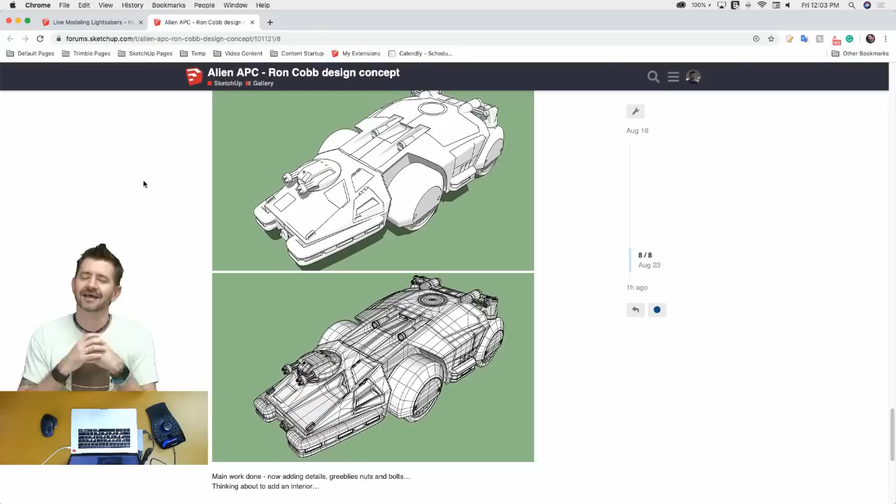It's pretty cool, it's one to keep an eye on in the forums. And that is by no means to say anybody else posting on the forum is not posting good stuff - that one just caught my eye. It was towards the top, and like I said, it seemed to be kind of in line with some of the other stuff we've done.

Awesome, so I said a lot of things. Now I want to hop in here, and I need your guys' input. Before we get rolling, we've got to decide what we want to actually do.

So I found these, I can't remember where. I literally just did a Google search, and I found somebody made these awesome, great drawings. There's probably more, but I found 4 that I was excited about.

Tengel07, hopefully I'm saying that right, showing up on the stream. You're doing an awesome job, well done. Glad you're on the stream, that's awesome.

So I caught you on that one. Hey, Red C's back. So I have here images for Darth Vader's lightsaber from Empire Strikes Back. Those of you who are dedicated Star Wars fans, if you're a committed Star Wars person, you know that Darth Vader's lightsaber hilt changed slightly from one movie to the next. So this is the one from Empire Strikes Back, Luke Skywalker's Empire Strikes Back hilt, his Return of the Jedi hilt, and then Obi-Wan from the original New Hope movie. So we have all of those.

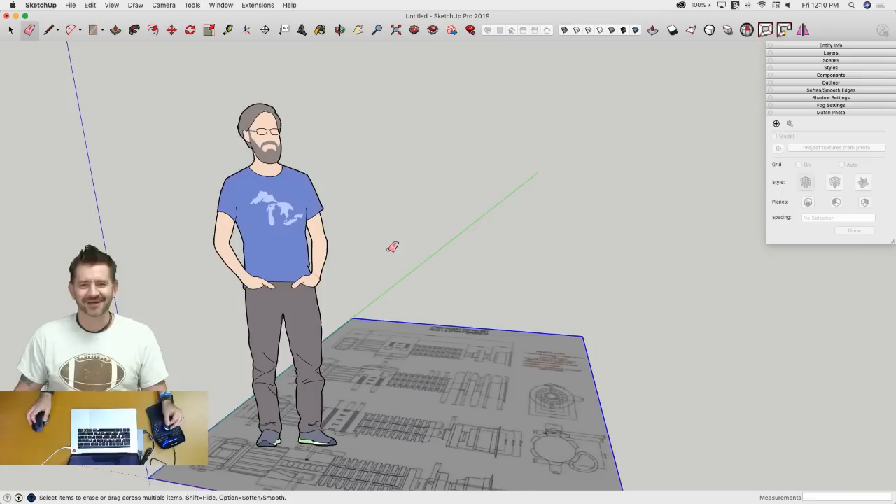I didn't even think to doctor up Mark for this thing. Should have put him holding a lightsaber, put a sweet Darth Vader mask on him or something. Man, really dropped the ball on that one. Remember Pirate Mark when we did the pirate ship?

Anyhow, bye Mark. Okay, so I'm trusting that this is the proper dimensions. I did not go out and verify. We're gonna assume that this is all right.

I will come back. So I did mention that photo match. Somebody asked about photo match. We'll do another video with photo match in the near future, I'll try to work that into one of the next ones.

Yeah, I blame you for that one, Steve. Come on, man. Where were you?

So right here, this right now shows this as 282 millimeters. So that's pretty small. I would be concerned modeling this to scale that I would run into the small face issue in SketchUp. SketchUp is really designed to be an architectural modeling tool, so it does have a limit to how small a face it can model. It's something like 1/1000th of an inch, but when we get into fractional millimeters, we can run into those issues, especially if we're going to do any rounded or smoothed parts.

So what I think I might do in this case is actually scale this to meters. So right here I have my biggest dimensions, the full length of the hilt is 282 millimeters. So I think what I'll do is I will just scale that as meters, and then we'll just scale it down by 1000 afterwards and have a proper sized hilt.

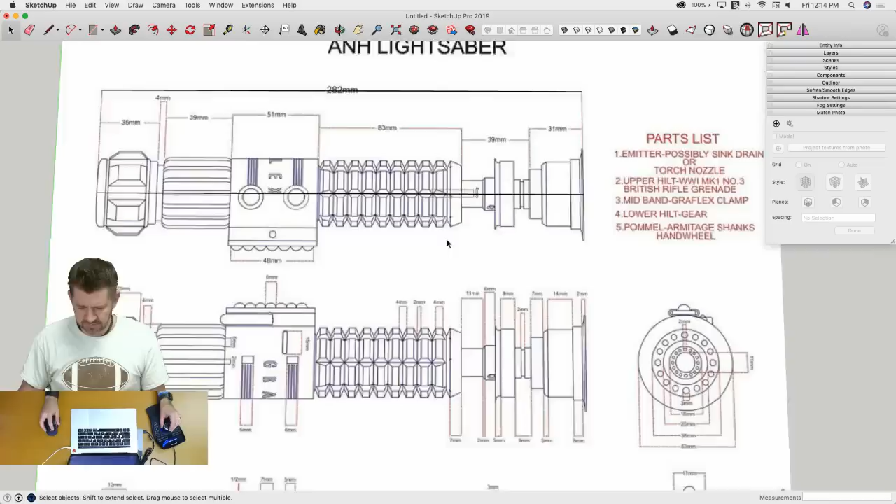Right down the middle, so that's going to be my center line. So what I want to do now is build this rectangle, and what I want to cut out of it is this shape. I'm going to carve that shape out, then do a follow me around a circle to get most of this. I'll have to come in and cut out this part of the grip.

Same thing down here. I'm a little confused about what this is detailing, but same thing down here. Maybe I'll just build these pieces on. So that's kind of my thought, is to start with a big follow me and then make adjustments to pieces from there.

So to do that, first thing I want to do is figure out where to start, right here. I don't want to arbitrarily just start drawing this stuff. I want to take advantage of the fact that I have dimensions here and build it properly and to scale. As I'm sure you've noticed, I've been called out for usually just building arbitrary and making it look right, but this time we have the dimensions, so I'm going to try to use them.

All right, first thing, this dimension from the middle up here is going to be half of this. I think this is the end - this is looking into the emitter, I believe is what that thing is.

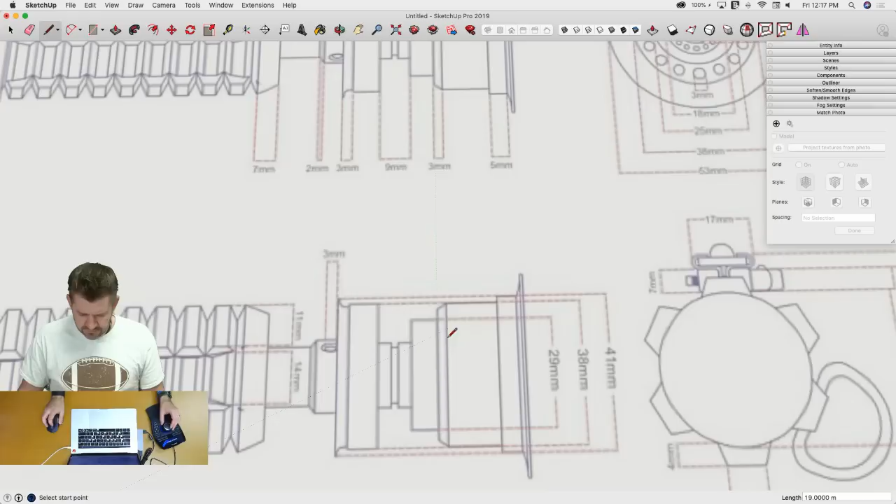Then we have this 3 meter step, and that drops to something. No dimension for us, so we have to guess that angle.

Yeah, these are not PDFs or anything, they're actually JPEGs, so they're not super high resolution. As I'm zooming in, I am seeing kind of fuzzy - that's not your screen, that is actually what they look like. I probably could have found vector illustrations if I kept looking, but I just grabbed the JPEGs I found when I first looked.

All right, so now we're at 29, so half of 29 is 14.5. And I'm saying meters because I'm actually drawing in meters. 7 meters, and drop that down. I'm just going to delete these interior lines as I go because I just want that one shape to route around. Let's see, how wide is this?

17, so that's 8.5. And then that goes across. They have this kind of detail weird - it's a full 9 millimeters.

Drop down, and then in the middle there's a 2 millimeter. So I'm going to go right here to the middle, come over 1, drop a line down, and go here back 2, drop a line down. Then for the difference here, that little cut in, I think that's right here, so it's 1 millimeter down. 17 overall to 15 overall, so I'm going to come here, drop down 1, cut that across. Woo-hoo, we're doing it.

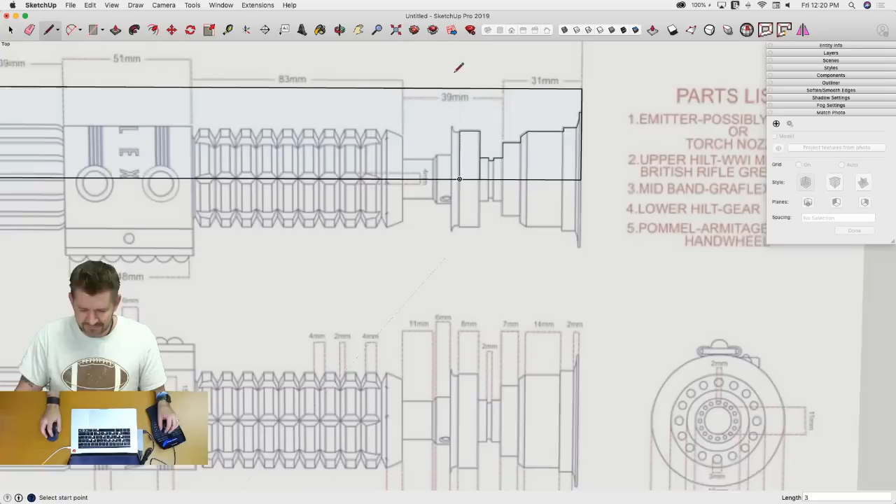My problem is I don't know millimeters well enough to know what I'm looking at when I look at a measurement. So, this is 41, so that's going to be 20.5 millimeters. Is that better? Can I say that? All right, and this looks like it's kind of got a 0.5. Don't worry, I wasn't upset or anything.

You're good, so I'm going to come over, I'm making this part up. I'm going to come over 1 here. This looks like it steps in a little bit. I'll go 0.5 here, 2 here, and then something like that. Yeah, I am drawing at scale, so I don't lose any small faces.

Let's see, width here is 19. So that's going to be what, 14.5? Well, that didn't work, I'll try it again. 19, no, half of 19 is not 14.5. Oh, I blame you guys for that one. Let's go 9.5, much better. All right, that's going to be 6 millimeters. Math is hard, you know.

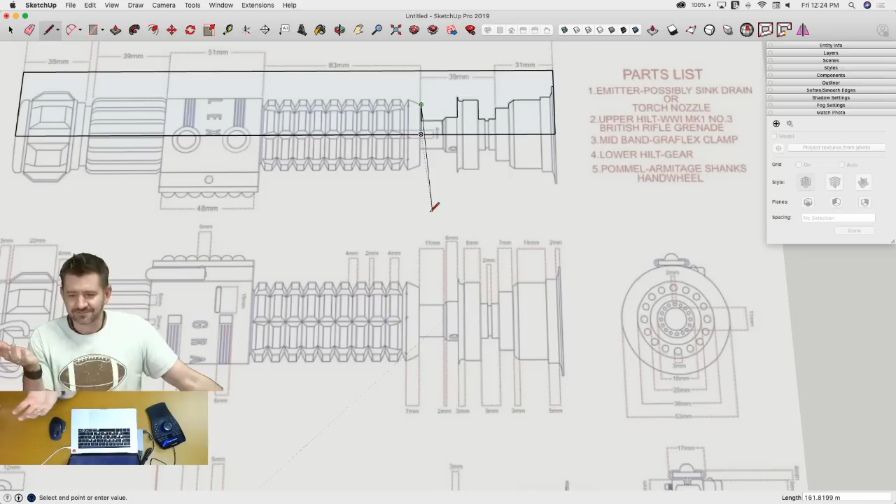Selt Balladeer, hey, you made it. I thought you were gonna have to wait till Saturday morning to watch this. I had a huge compliment on the YouTube comments yesterday. Selt Balladeer, I don't know if I'm saying that right, commented on YouTube that he couldn't watch the live stream because he was working, but he would watch it Saturday morning. It's like his new version of Saturday morning cartoons. And as a child who pretty much lived for Saturday morning cartoons, I took that as an enormous compliment. So thank you very much, I appreciate that.

All right, so here, where was I? Oh yeah, so I thought this said 35. 35, half of 30 is 15. So it should be, what did I put, 16.5? That's the problem. So it should be 17.5. No.

That is 35. What if that says 38? What if I can see this any better? What if this looks any better in preview? That's better, it's 38. It looks like it's about the same width as this one. That was 38. Okay, 38. 38 it is.

All right, so we're going to go. Half of 38 is 17? No. 19, there we go, whew. Mathing. All right.

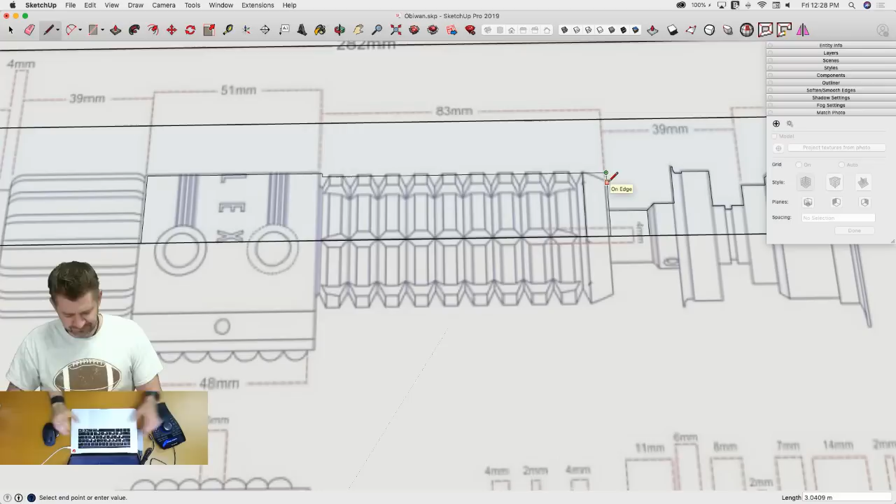Yes, I thoroughly enjoy the idea of drawing a 38-meter line, grabbing it by the midpoint, and dropping it on. I was trying to look smart for you guys, and well, obviously that didn't work. So that would be a great way to avoid the math problem.

All right, moving along. We're just flying through this thing. Obi-Wan's gonna be done in no time. All right, this is a 41 millimeter, so this is 0.5 meters up, and then 39, and then drop back down. I'm gonna come back and round this off in just a few minutes. I want to finish off the profile first, and then I can come in and add a couple details before I do the full follow me.

All right, so next thing we have here is this little collar, just a little step in. There we go, 33 millimeters. So that's 16.5. That's showing up close enough, so I trust it. I sometimes trust my math abilities.

38. Ooh, that's the same dimension as we had before, so I can actually just reference this dimension right here and then come across 4. I'm just dropping lines back down again, so I have that solid line to pull off of.

All right, now for this part, I guess I'll put as much detail in as I can. I don't know in the actual piece if these sections right here are rounded between these pieces that step up, or if that's a flat piece. Either way, we can draw this thing in, and then we could smooth that out with the circular face, or we could actually keep the curves. Either way will work.

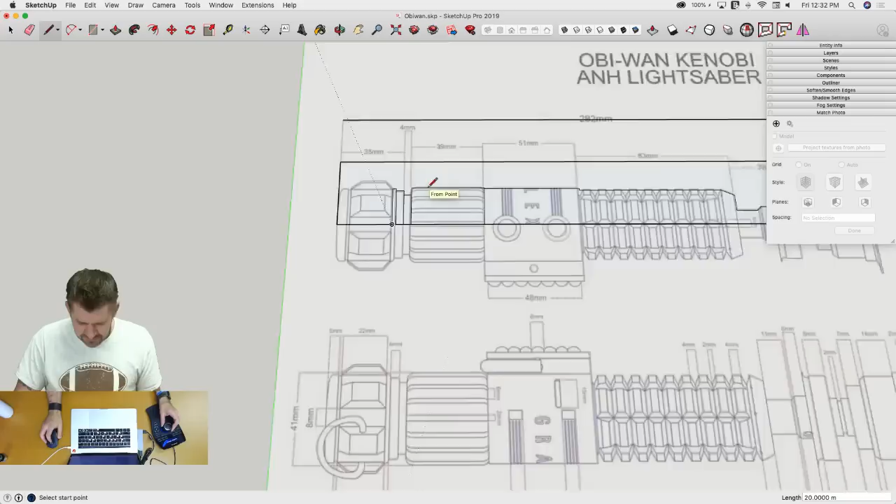This is the one where I'm kind of not quite sure what to do. I guess this is that line, maybe. I don't really have a dimension to it anywhere though. All right, let's see what the drawing tells us. So if I wanted to come up to here, 19 looks a little too short. So maybe it actually is right there, so it could be the same dimension. All right, we'll start with it. We can always make adjustments, right?

It's never too late. All right, so we have a 2 millimeter inset there where it steps down. Does not have a specific dimension, but I'm assuming it's like 1 millimeter. I'll come over 2. And I do have a dimension on this end cap, I think. Right here looks like 40. So, 20. And then last 5 millimeters.

All right, so that is the basic outline. Now I want to come in and just add a few details. I have just a couple arcs I want to put on here. So I'm going to come in with an arc right here. I'm just going to drop that same arc. No, it's not going to let me do that. I'm going to pull that line straight across like this.

Temporarily delete that. No, still doesn't want to. All right, I'm just going to recreate that arc real quick.

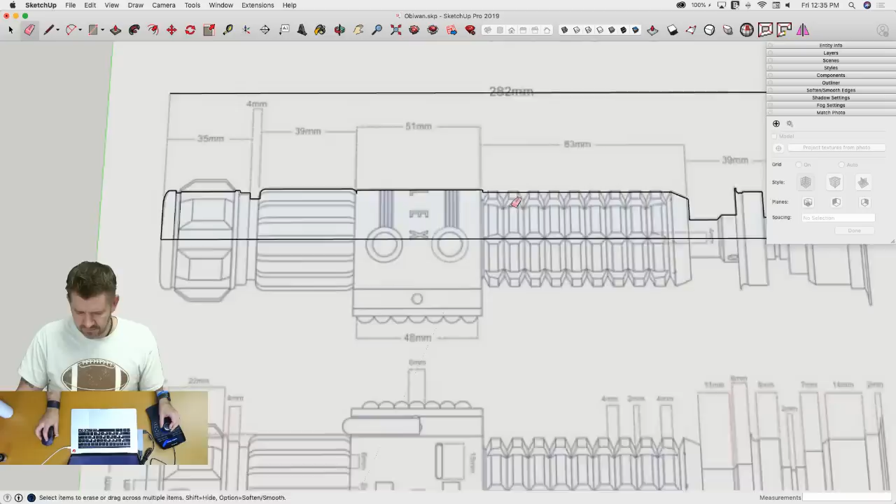So here's the other thing I'm kind of thinking about. I do want to hold on to this. I'm gonna make this a step in. I can't see the detail here, but I'm going to force that to be a little bit smaller, stepped in there. And then I'm gonna delete all my interior lines so I have one surface right there.

And I'm gonna save, because why wouldn't you? Of course you would save. Silly question. All right, now I gotta pick a circle to make that turn on.

So the difference between Bezier and arc, the standard arc tool - well, I say standard arc tool, but it's actually the 2-point arc tool - lets you pick 1 point and then another point and then drag what it calls the bulge distance out. And the bulge distance is the perpendicular dimension from a line between the 2 points to the middle of the arc. So that's the bulge distance, that's how it's always uniform like that.

When I go to Bezier - Bezier is not technically a native tool, it is an extension, but it's made by the SketchUp team, so it's actually kind of like a standard tool slash extension all in one, I don't know how you describe it. What this lets you do is pick 2 points, and then I can actually pick the control handles.

So where is this first arc, this bottom point, where's the arc going to go to? And on the second one, where's that going to pull from? So I can create much more flowing arcs, and they don't have to always be basically a chunk of a circle. The standard arc is always a piece of circle that's put out there. The Bezier will let you actually make non-standard arc shapes.

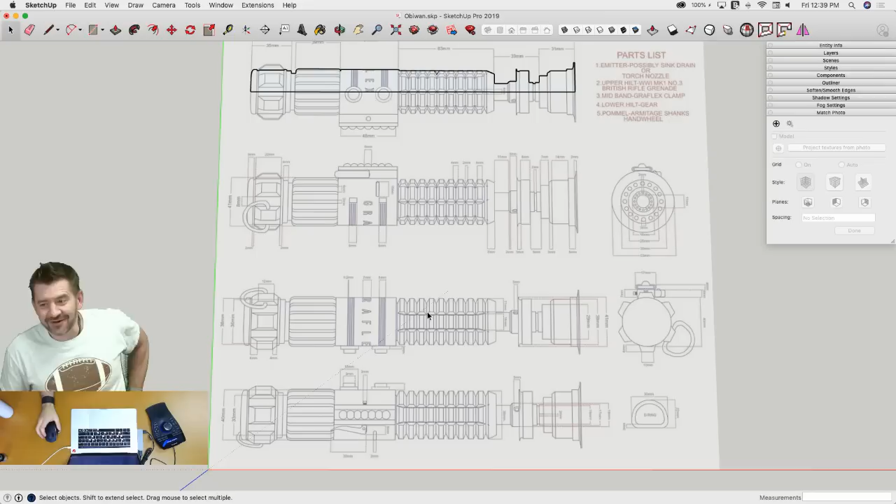That's odd, so can anybody find good pictures of that? I'm gonna throw that out - if anybody can find a good, solid, maybe isometric picture that'll help us figure this out, that would be cool. I do know that, I think, again, from documentaries, I think this is like the handle of a grenade or something. I can't remember, it's something weird.

Oh no, because it is 6 sides, I'm just looking at it rotated. We're good, brain just had to work through that one. Never mind, let's move on. I always appreciate you guys. Just let Aaron talk a little bit, he'll figure it out. All right.

So if I dimension across this, I think... oh, it's 4. So okay, so I have to go, so if I draw a line that is 4, I grab this and this, option copy. I'm not doing an array intentionally because I actually want to see where this stuff all lines up.

Okay, so one more option. Whoops, help. Oh, I got the picture somehow. There we go. Option copy. And I guess just one more right here. I'm a little off right there. So that's where I was wondering if I might need to.

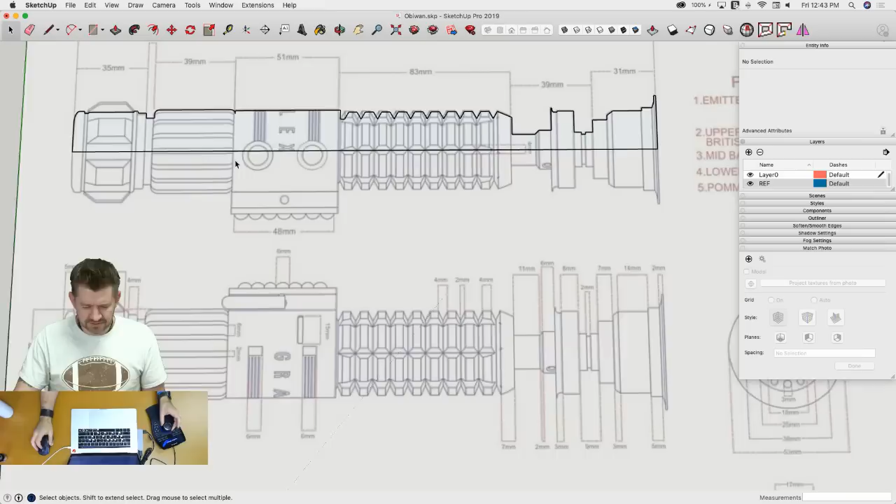My question still remains, how many sides should we put on? We want to do something that's divisible by 6. I have 6 things here, 6 things here, so it's going to be easiest if whatever I create, my final extruded shape, ends up divisible by 6.

Other thing I'm thinking about is right here. I'm not really sure what these are. I assume there's some kind of cuts into that rounded off piece. 1, 2, 3, 4. I don't know how many there are. Because what would be nice is to come up with a number of sides that is divisible by 6 for this part and this part, and divisible by whatever number this is right here.

I don't know if anybody has a good Obi-Wan image that can tell how many of these there are. 1, 2, 3, 4. So maybe there's three on each of the 6 sides. There's a picture on the forum that just went up. It looks like they're definitely cuts into it. Pretty sure that's the original movie prop, because I know that was 3D printed. Just kidding. 1, 2, 3, 4.

12. Okay, 12 happens to be divisible by 6 as well. So I might just go with the standard 24-sided piece. The nice thing is I'll do it once, we'll look at it. If it looks like it's not quite high enough geometry, we can always come back and change it.

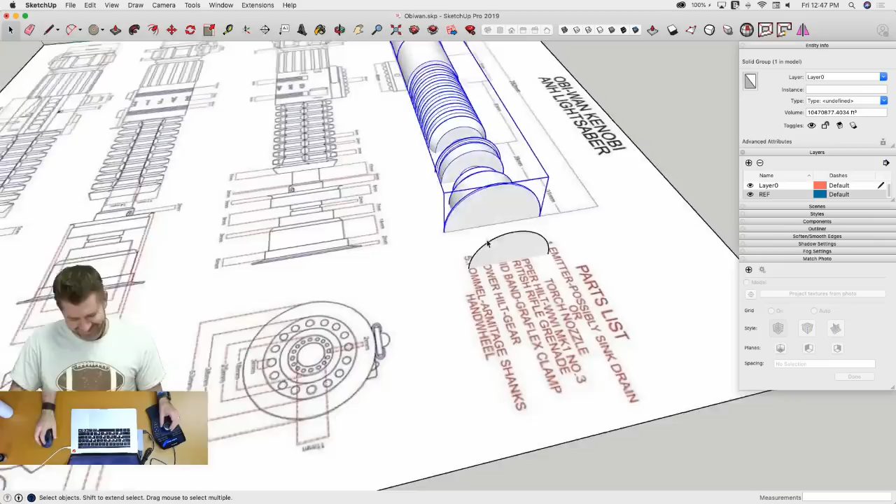Good-oo, Jimmy, you win. That's good-ooing, boy. You guys Simpsons fans? I used to watch Simpsons a lot, so I get Simpsons lines running through my head all the time. You got one too? Oh, thanks, Marvin.

All right, so that looks pretty good. I'm tempted right now, before adding this additional piece, to just stick this thing in here. I never really understood what this was, but it's on the side of a lot of the original trilogy lightsabers, and it's cool looking.

So I want to do it, but I think I'm going to finish my volume here first. I'm going to go make my cuts here and get my little pieces popping out in back. So here's what I'm thinking about—I'm going to draw a line right here, make it a long line.

This cut down—what did we decide it was? That was 3.5 millimeters, right? So I'm just going to draw that same triangle, assuming it's the same, and we'll find out right away if that works or not. And this was 2. Actually, I'll just drag it up so I have a bigger piece of material.

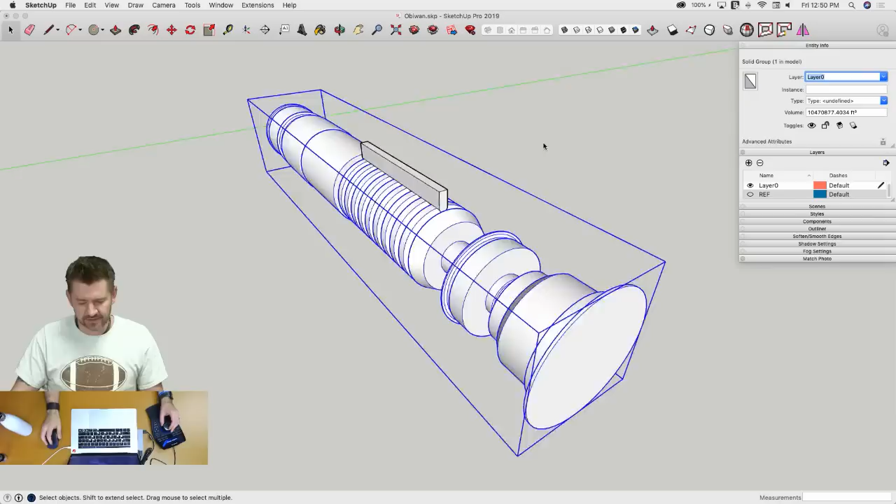All right, so what I could do right now—I have to remember, like I was saying, this and this are going to intersect. It doesn't know that this is only supposed to intersect these rings. That's why I had to use scale to pull it back, so it wasn't offsetting or cutting out of here.

Now that I have this, I should be able to save. Always be saving—ABS.

Go to Solid Tools, and I want to trim, not subtract—if I subtract, I'll actually lose my cutting group. By using trim, it cuts out of one volume but keeps my cutter. So I think if I hit trim and click on this... I'm probably doing this backwards, but ooh, I didn't do it backwards—it worked.

All right, I'm going to go ahead and rotate it. I'm just going to draw a line right here down the middle and take that right now—at the middle, yeah. And I'm going to... there we go, I'm going to rotate that. Oh, I didn't do it right.

I had it backwards. That's a cool looking little thing. I made an offensive weapon of some sort. Undo, undo, undo. Okay, let's try it again. Select this one, trim that from this volume.

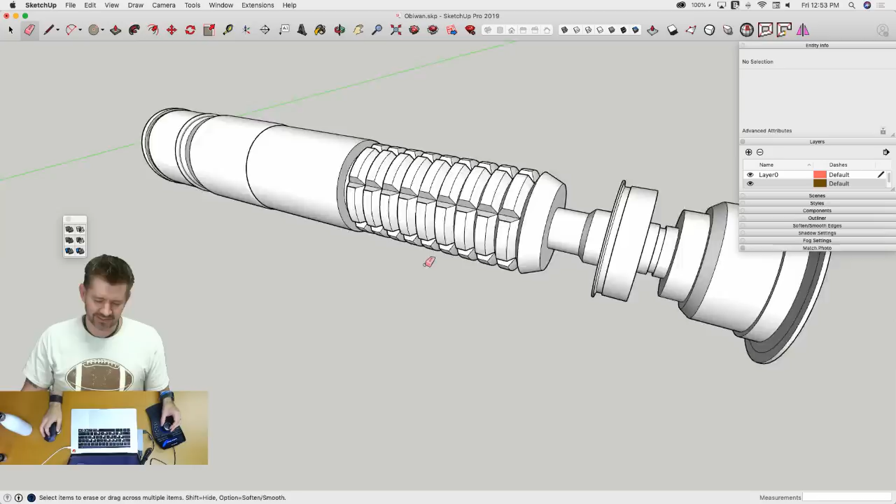Now I'm gonna turn my reference layer back on real quick. Whoops, I made another layer. I must have put this onto... nope, I don't know. I made a blank layer. I hit space at some point and made a new layer.

Anyhow, all right, so it does look like this first 2 millimeter cut does line up with this centerpiece right here. Ooh, I got an ooh and an ah from Marvin. Extra points right there. All right, I'm gonna come in here to the top.

So this gets a little bit, so this is rounded on both sides. So sometimes clicking... I use the facets of the circle a lot to arrange things and align things, which is why I really try to make sure when I make circles, they're on axes. In this case, everything got rounded, so it can be a little harder to use these as reference, and that's where I turn on show hidden geometry.

So what I can do here is come in with a rectangle. I'm going to hit Option to snap to the center. I'm going to hit the up arrow to draw from the blue axis, so I'm drawing it flat, and I'm going to click right here. And I'm going to pull it out. Let's see, how far is it to here? That's 39 millimeters, so I want to say 39.2. And that gives me that rectangle.

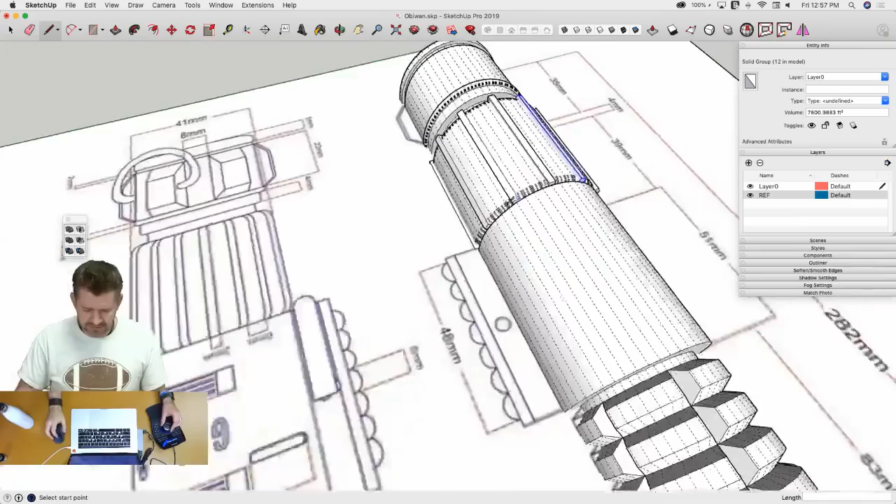We'll try it, X11. That doesn't seem like enough, you guys. Not arguing with you, just saying it doesn't look right. So it is dimensioned on here as these pieces are 2, and then these pieces that are risen are 6. So if we do this, this is 2, and this is 9.

So I'm wondering what happens if I take this, and rather than going 30 degrees, what if we go 20 degrees? I don't know how many copies to make, 15, 20, I don't know. All right, let's see what that looks like.

So if I dimension that, this says this is 2, this says this is 5.3. Looks closer though.

Let's see, from here, if I look straight down on it, this shows me 1, 2, 3, 4, 5, 6, 7 of those cuts. 1, 2, 3, 4, 5, 6-ish. Yep, this is where we decide that this is Aaron's Obi-Wan Kenobi lightsaber.

We're getting very dangerously close to the point where math is going to get involved, and I just can't do that right now. So I'm going to save this, turn off my hidden. I'm going to grab all of my cutters, and I don't even need to worry about it, sorry, I tried to do things and talk there. I don't know, I'm just going to cut it. Oh, I'm not worried about losing my cutter since I made copies of the cutter.

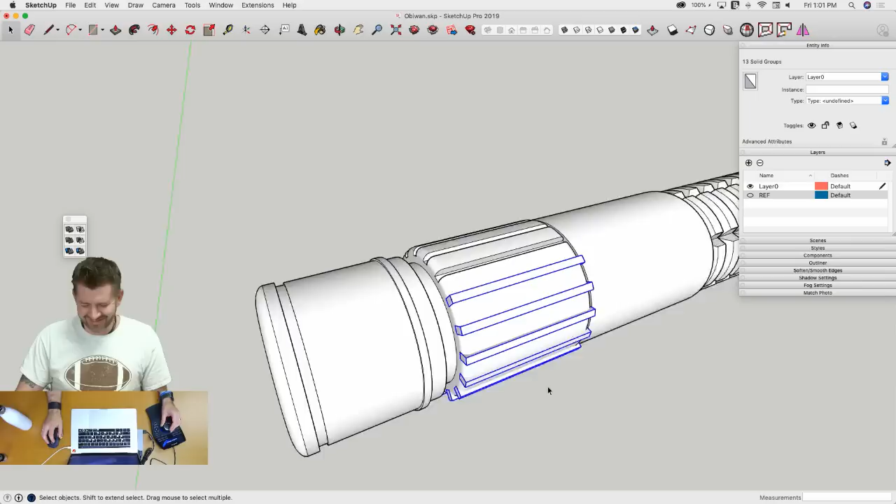Oh, yeah, that's exactly the thing. Dave. It's just a good thing you're here, man.

All right, I'm gonna come in here, select all these other groups, explode them, and now I should be able to select this, cut that from this all at once.

You know, sometimes... I don't know, I want to be cocky and say I knew that, but I believe Dave has called me out on doing just that exact same thing in the past. But yeah, this is what happened.

Okay, anyhow, yeah, there was a measurement for those exact pieces, but I don't know how they're being dimensioned, because this is being dimensioned along a round surface, so these are actually kind of like ribs standing up on the metal pipe too, so they're a little different, but this works for what we're doing right now.

All right, I'm gonna draw one of these teeth. There are, I don't know, they look like gear teeth, so that's what I'm gonna call them. I'm gonna draw the middle of one right here, flat on top of the image, using this as a reference. I'm gonna come out. Is there a dimension for how tall these things are? Nope. All right, so I'm just gonna come out.

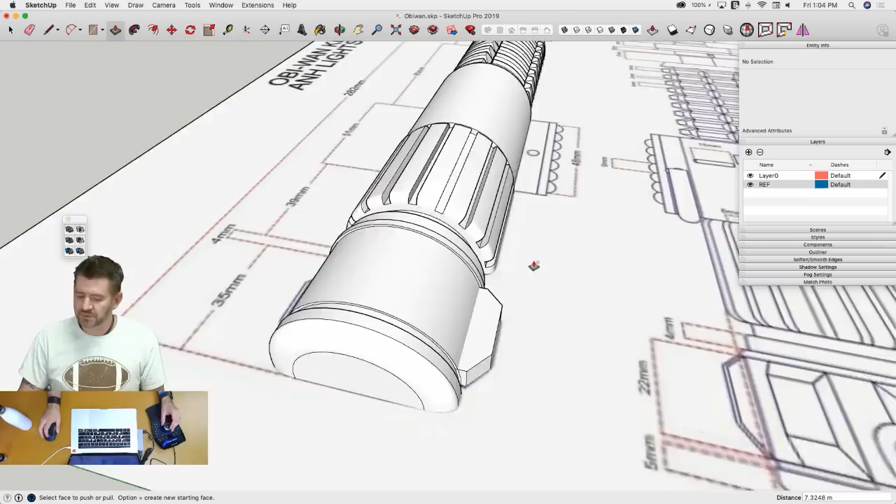Most people who regularly use 3D mice were in favor of getting one. I thought of that because this whole thing where I switch underneath and model it, or come in close on a push-pull inside a small surface like this, is super easy with a 3D mouse. Just throwing that out there, you guys know I'm an advocate for it.

All right, I'm gonna make that into a group. That should be solid. This one's easy because there's a total of 6 of these. I don't know why I keep deleting this line on the end. This is my midpoint, I need to hold on to it. I'm gonna grab that, that would be 60 degrees, times 5. All right, there they are, looking good. Now what I should be able to do is grab all these and make them into a group, go into that group and explode them.

So there's the question, did I need to make them a group originally? Anytime I move geometry around on other geometry, I tend to group it. Yes, this is a group, this is locked, so there's not a whole lot that I could have accidentally merged with, but I do it out of habit because as soon as your geometry sticks together, it's a pain to go in and take it back apart. So I group things anytime I move any geometry.

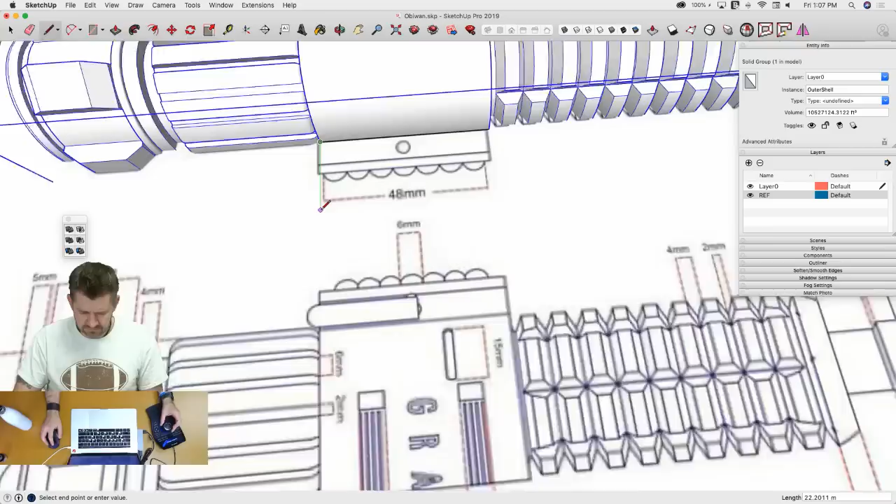So I'm going to again start with, here's my reference line. This comes out... showing no, that's the 7 millimeters, see where 7 ends up. Oh, 7's to here, the bottom part of the box. Oh all right, so I'll come up 7, and that's this.

And then this is actually, this is kind of a weird shape. How wide is this? 17 millimeters, again can't go with a nice round number, gotta force some dimensions on here. All right, so 8.5.

And what this actually ends up being is there's kind of a piece of metal that wraps around in one direction, and then this array right here with all these little round studs, which are like little plastic bulb things, are actually held by this piece of metal, which you can see in the profile here, actually sticks up and grabs onto it like that. So I'm not going to get ridiculously detailed in here, but I am going to put a little bit of this detail in because it's cool.

All right, so I'm going to leave a 3 millimeter gap in the middle. I'm going to grab this, make it a group, and I'm going to... oops, I have a habit of clicking Option when I don't need to. All right, so I'm going to do it like this, and I'll come down 4 millimeters, over 1.5.

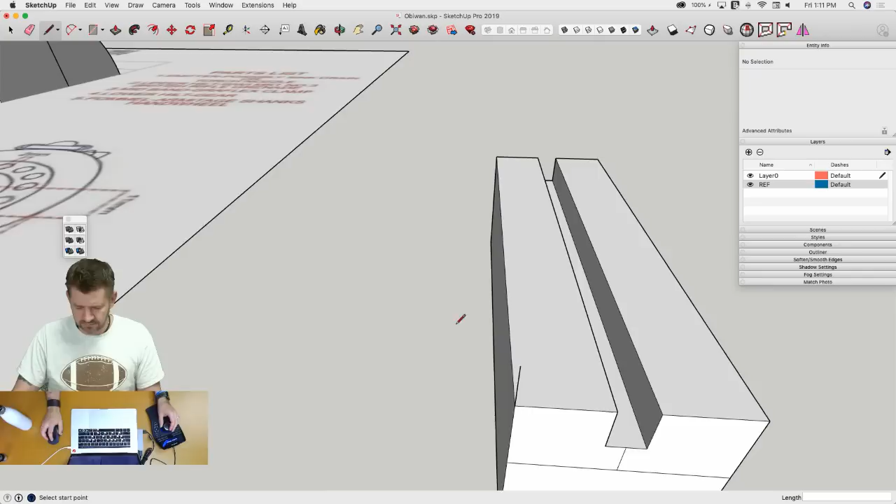And then what I had here was, look at this, got a little bit of an arc going on right here, here to here, just like that. I'm going to come down 1, go up 1. All right, that might not have been quite big enough of an arc there to close it all up.

Yuri says you can model a separate piece as a copy of a component. Yeah, I could have done it and left it in. You're absolutely right, I could have left that right where it was and pulled it out as a component. That is a good call.

I didn't because, I don't have a good reason for not having done that, but you're right, that would have worked perfectly. All right, I'm going to take this and swing it around like that, and push-pull that down. Get rid of some of these extra pieces, take this one down, and I'm going to stop it. I'm going to make that all into a group. I'm going to come in here right now because it's bothering me. Select all and soften and smooth. Oh yeah, it's looking good.

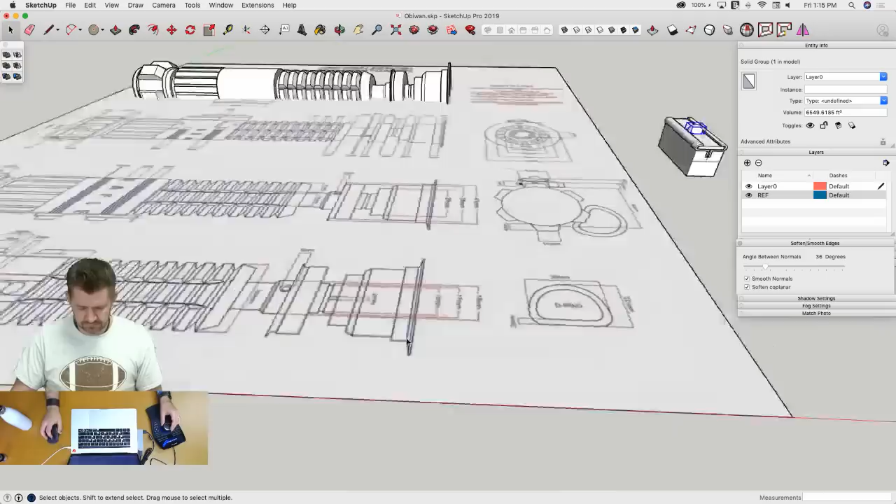Now, some of you think I might be tempted to use math or something here, but I'm not gonna, I'm gonna fight it. There is about, I'm gonna say, a 4 millimeter gap between the edge of the end circle and the outside of this flat section. So I'm gonna come right here to the middle, and I'm gonna say 4 millimeters.

Now I'm gonna grab this circle, grab it with move, grab it by that same endpoint, option, and drop it right there. And then I'm going to divide that by 3, enter, and that gives me my offset.

Doesn't quite look right though, does it? It's like they're, I don't know, I'm going back and forth. All right, let's just do this. I'm going to grab these 3, turn on my hidden geometry, go from the middle here, and just swing those around like that.

What am I doing? It doesn't look bad, let me do this. Let me make all this a group real quick.

And I'm gonna do this, swing it around like this, swing around like that. And I'm gonna grab by that same placement point and drop it right here so I can kind of reference.

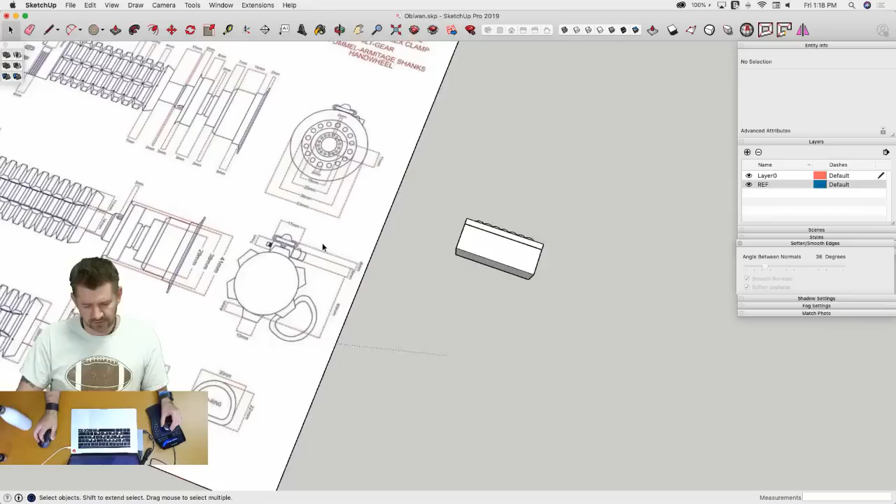So there is, I can't remember what these are called, these little pin thingies, like clips open, and there's like a little bit of, because of deformation, a little spring right here. It'll actually pop open when you pull up on it. One of those. I know my definition made no sense whatsoever, but well, I already said it, so I can't take it back. I'm going to make this.

So if we look at the different profiles of this, it looks flat right here, but I have a dimension here to put it in. And then here I have, it's actually a single piece of material that's folded over like that onto this pin right here.

I'm going to, I think I'm just, I don't know. I don't know what I'm going to do. I think I'm going to trace this profile since I have it, and then give it a little push-pull, and then offset the two pieces, and then come in and maybe loft together this end piece.

We'll see. So I'm going to do something like this, like this, like that, and like that. Let's see if we can just connect this together.

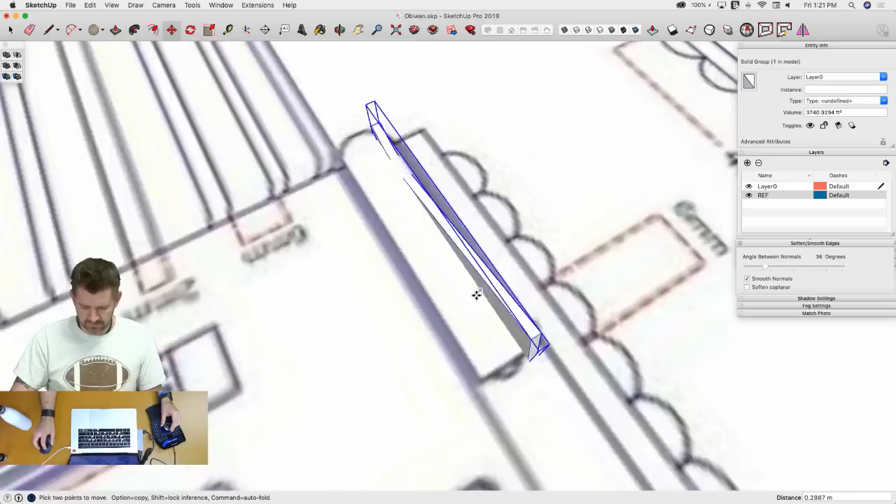And then, whoops, scoot it over this way a little, just a touch. And then we're going to go from here, slide this over this way, we'll say exactly 5 millimeters. I did something wrong, let's try that again.

Let's grab an absolute point, let's grab this intersection point right here. Option to copy, we're gonna bring it over. Let's see if 5 is too far. That'll work. How big is?

I think that's gonna work. If it's too big, we can make it a little smaller later on. All right, I'm gonna grab both of these and explode them.

I'm gonna go click here and draw. Oh, it's a cam lever. Cam lever, that sounds like a correct thing. Cam lock or cam lever. Yeah, that's the one. See, it's a good thing you guys are here.

All right, so I'm trying to think of the best way to do this. I want to get this - you know what, actually I need to do is I can round this off later. I'm gonna get rid of these little things right here. Is that around 1 millimeter? No. All right, so this will get a little messy, but that's okay.

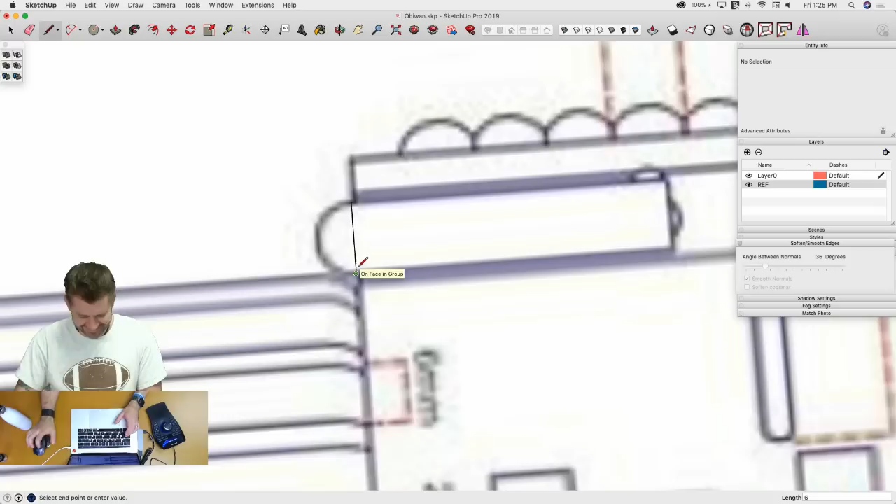And I'm going to draw a 5 millimeter line. Oh, 5 plus 1 is 6, sorry, 6 millimeter. All right, start over. Draw a 6 millimeter line and then draw a half circle arc like that.

All right, so that is what I want to cut out of my shape. So I'm just going to make a temporary - at this point it's just a cutting tool. So I'm going to make that and now make that into a group. Now if I go to edit, unhide all, get that back, and I can bring this over.

All right, there it's intersecting. Pull it back in just a little bit so it cuts. There we go. And as I have learned today, I want to cut this from this. Oh, and it's just that easy, guys. See? That's what I've learned.

Awesome, so there is our cam thing. All right, I'll soften that again. And one thing I didn't do here was I did not put a circle in, or a hole in here for the bolt to run through.

I'm just gonna put a 0.5 circle right there. I'm gonna run it all the way through, grab all this mess, intersect face with selection. That'll just break that, so I only have to do the circle once. And then I can just go delete, delete, delete. And now I have that, which I can

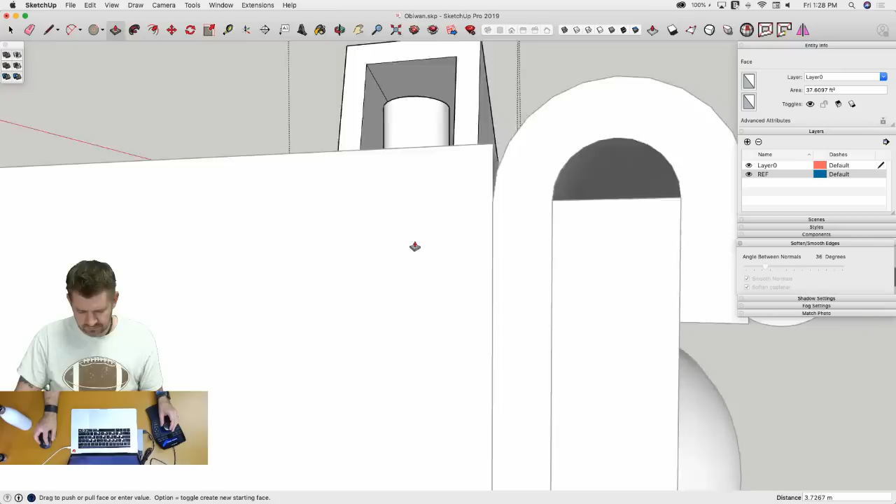So that's going to come up here, and it's also going to extend through. It's all falling apart. All right, get rid of all this. Just get rid of it. There we go. I have my circle up here.

Now I just pull a circle down through the other side, and then additionally. So that gives me this, which I can now, if I grab this, I'm actually going to move it by like that point right there.

Put it on my drawing. Do a little scooting to line it up. Like that. Now I know I can grab this one, drag it so it comes out like this.

All right, and now I can take that whole thing, make it a group again. I'm a big fan of nesting groups, thank you for asking. And I'm going to flip it 180 degrees.

And now I can grab this point. This is the point that I wanted to place it by, because that point should go right to there.

All right, two small details left. One is a D-ring. D-ring's going to be super simple. I'm going to draw a line.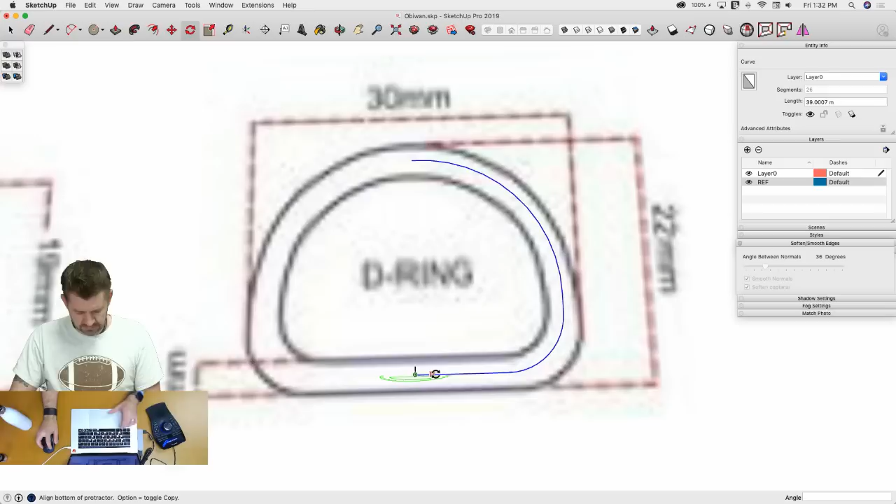I'm going to grab these 1, 2, 3, 4 pieces and weld them into one. Grab that piece. Option copy, option rotate to 180 degrees. All right, and the last thing is going to come to this middle point right here.

And draw a circle of 1.5. Now, actually I'll weld these two together too. So I'll grab both of those, extension weld, grab that distorted D-shaped circle, follow me, click here, and we have a D-ring.

All right, triple click, make that a new group. And I'm using groups instead of components, and I just realized I was doing that. So no, there's not a good reason for doing that.

Usually my rule of thumb is if it's a thing, you should be using a group. These are all things, but for some reason I'm not making it into, or if it's a thing, you should use a component. But I'm not doing that for some reason, so I don't know. I'm disappointed with myself.

All right, I'm gonna take this and I'm gonna just flip it over, because this right here is where this D-ring goes. So I'm going to start by rotating it 90 degrees just using the regular handles. I'm going to turn on my hidden geometry because I'm going to grab one of these points on the middle line.

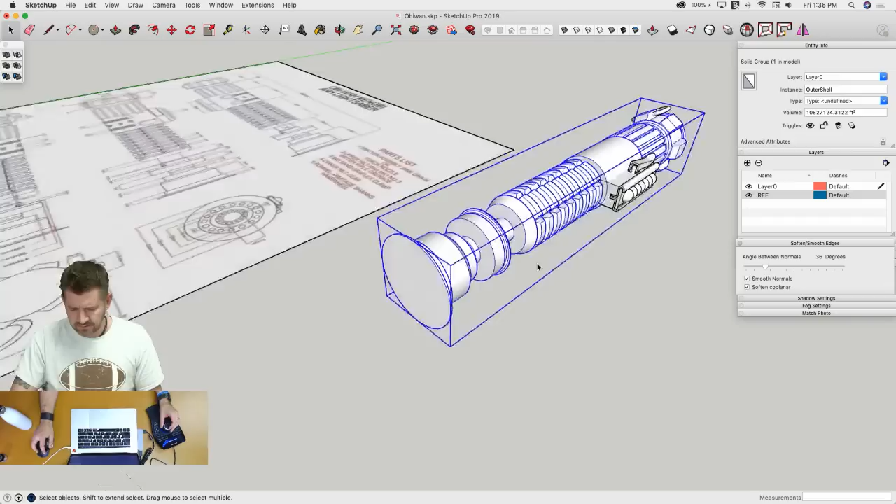So I'm gonna take this one, this is all, okay, so I'm gonna explode this temporarily. And let's see, from 53... now I'm gonna have to really do math. So that's a 2.5 meter offset. Nope, that's obviously not right. No, I'm cutting in half. There's a 5 meter difference. So 5, all right, that's that.

So then this is going to push in. Ooh, not very much, it can only push in about this far. And that's where these rings go, that's where these circles go.

And then from that, I have 5, 6, 7. I'll offset this 7 meters. And that can push into, it can go all the way down to this, or what if it only goes to... oh, it's too far. Maybe it goes just to here. How about that? All right, so that's this ring right here.

So now we go from 25 down to 18. So offset that another 7. Something doesn't look right there, but did I do that wrong? 8, I did, I totally didn't do that last. Undo, undo, undo. That's what I get for doing math in my head.

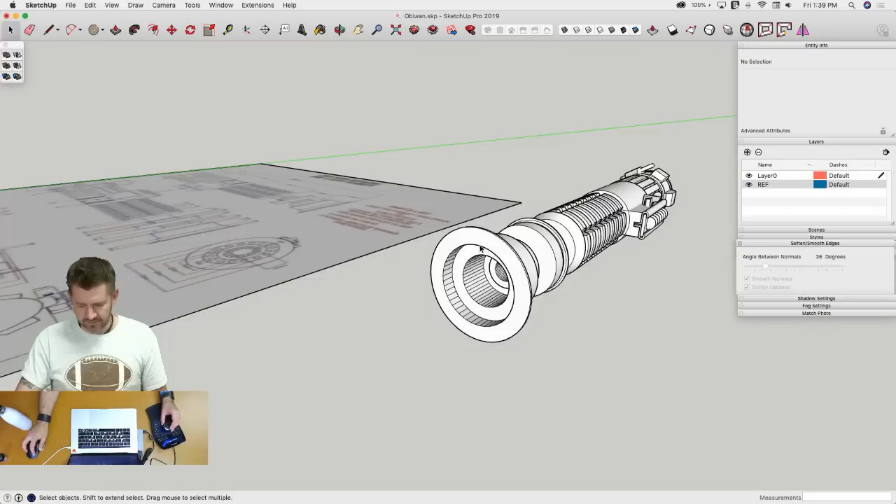Where are we at time-wise? About an hour and a half in. I'm not gonna mess with it. Well, no, I can't help myself, I gotta do the holes. It's only gonna take a second.

3mm holes, 1, 2, 3, 4, 5. Oh wait, 1, 2, 3, 4, 5, 6, 7, 8, 16 of them. Okay, so I'm gonna just draw, find the top of my circle, draw a line straight down. So on that, I'm gonna put a circle of 1.5.

Oh, I didn't draw it flat, did I? That's okay. All right, and then I'm just gonna pull this in. Sure, 5 millimeters. All right, and now what I'm gonna do, I'm gonna grab the geometry of the end and geometry there and the circle here. So everything that makes up that circle, and I'm gonna go, again, just gotta remind myself, don't have a middle point because it's not really a circle.

Like this, and I'm gonna bring it all the way around to 360, divided by 16. No, that doesn't work. Twelve degrees, no, 15, divided by 15 total? No, that was not right.

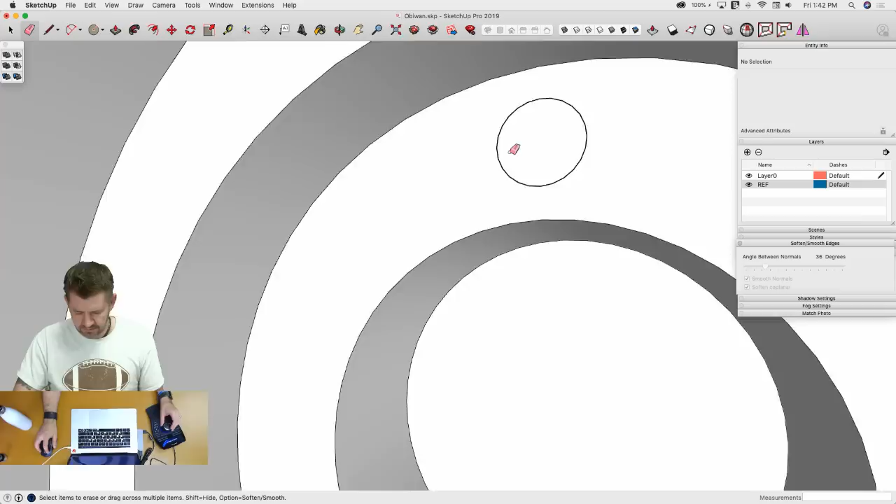For some reason, why is my circle not closing right here? I don't know why, but it is now. All right, so I'm gonna do the same thing, exactly the same thing I just did. I'm gonna offset that, or not offset, I'm gonna rotate a copy of that, 22.5, times 15. All right, and with that, our Obi-Wan's done. I'm gonna take this, make this back into a group.

I'm going to trim the D-ring. Oh, this is not a solid. Let's run solid tools and see why not. I have one internal face fixed.

All right, so I'm going to take the D-ring and trim it out. That's going to give me a hole in this tooth or whatever thing it is. There we go, that intersects correctly, but I do like it as a separate piece. If I ever wanted to build this, I would obviously build that separate.

Trying to decide what to do with this. What I think I want to do is explode this group and then intersect. I'm going to explode this group too, and I'm going to take this piece and this piece and merge them together.

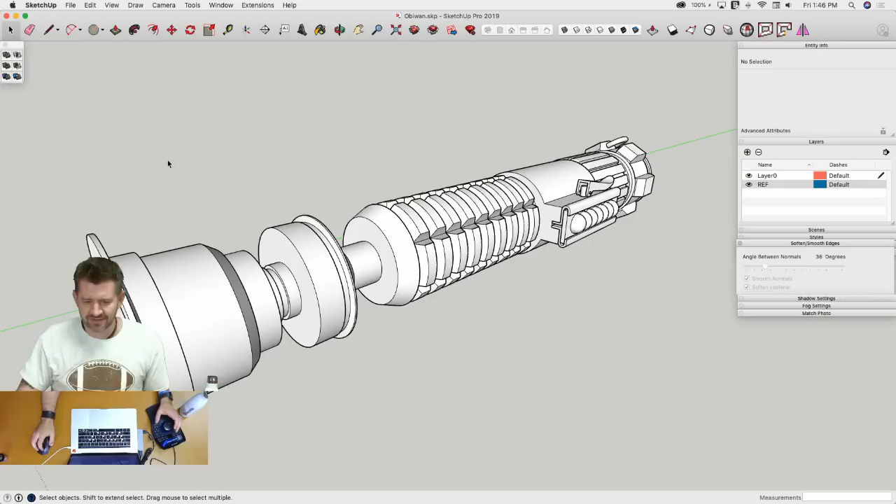All right, you know, and here's the thing. If I hadn't had to do math on that, we probably would have ended 20 minutes earlier, but I gave in and tried math instead of just having SketchUp figure it out for me. But SketchUp could have figured it out for you? If you know the right tools, you can get away with doing as little math as possible, which is something I work pretty hard at, avoiding math.

All right. I'm going to save that. I'm going to start a new one.

Okay, hello in India. Zion just joined, and what time is it in India right now, Zion?

I'm going to go, we said Darth Vader next, so I'm going to go ahead and import. Desktop, where's my Darth Vader? There we go, I'm going to import Darth Vader. Oh, hold up.

One last thing here. I'm going to grab this and scale it to 0.01 because we want this lightsaber. Almost forgot that piece. This lightsaber should be, was it 200 something millimeters? 2 meters. So wait, hold up. Let's go.

Jump back to millimeters. If I draw a line from here to here, oop, I got to scale it down by 10 one more time. I should have done 0.001 to scale that to the proper size. Nope, I did it wrong again. Told you. I just need 0.1. That's all I got to do. Keep it simple, come on me. All right, look at that.

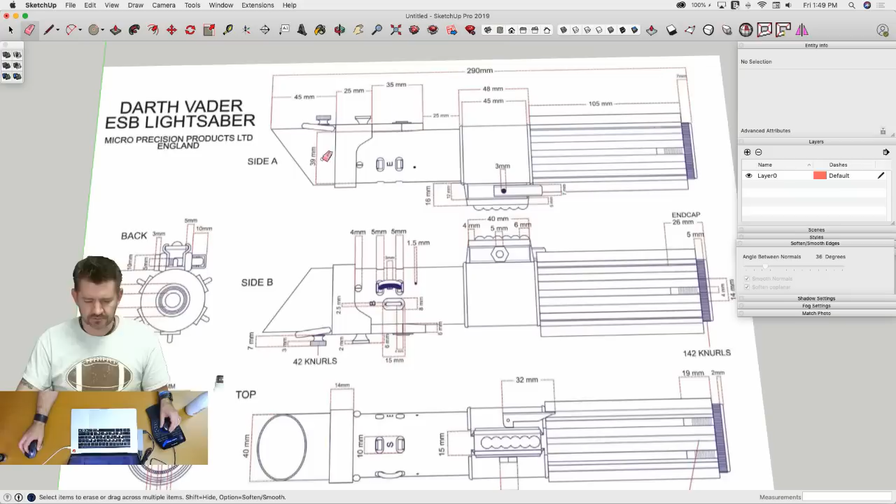I was just thinking maybe I'll try to model it exactly like that, see if I can do it. So 1, 2, 3, 4, 5 main pieces. We'll see how it goes. All right, so I scaled it up, but now, just like before, my default template is architectural fractional inches. So I know.

LTL Baby just called me out and said, it's called a calculator. I've heard of them, I know, it's ridiculous. Part of me has got this little bit of shame. I'm like, why can't I divide 37 in half? I could figure that out, I could do that, but I can't do that. I just need to acknowledge who I am.

So I'm going to go to decimal meters again. I think a lot of this will be able to actually pull right off of here and not have to worry about tracing too much, but we'll see how that goes.

First thing I have, you can see this piece is the actual tube. So I'm going to start. I'm going to go to the top view so I can find something that I can align a center line with. So I'm going to go to the middle of this screw line and draw a line from here up to the end of the emitter, and then I'll draw it back, 290 meters.

So this one will be a little bit different, but I still want to have some reference dimensions here. 39 is the actual size of my tube. So I'm going to come to right about... sorry, hope I'm not getting anybody sick with spinning around, but I'm trying to see all my dimensions at once. It's not easy, there's a lot of dimensions on here, and they're all kind of spread evenly across the 4 different views.

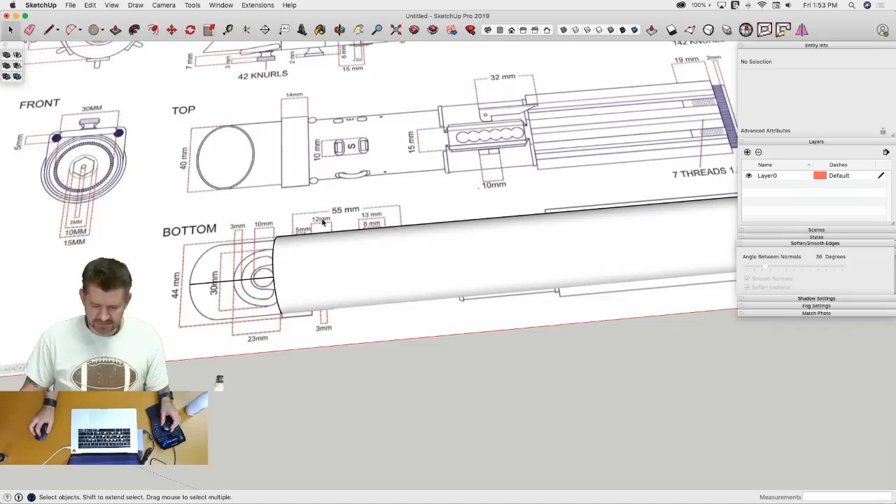I do want this to be a tube though, so I'm gonna come in here and offset just a small amount, I'll just go a half millimeter. Does that work? And I'm gonna pull that all the way through. That's gonna be the body of my lightsaber. So I'm just gonna grab that right now.

Nope, I only want that, I don't want... I only want part of this line. There we go. Nope. There we go. I'm gonna make that into a component this time, I'll call that the body.

And now I can build my other pieces out onto that. This does have a bunch of cuts in it and holes in it and stuff, you can see all these things.

I guess Darth Vader's lightsaber is USB chargeable. Looks like it actually looks like a USB-C port because it's in the future. No, it's a long time ago. I don't know.

Anyhow, I can start building up this shroud piece. All right, so right here I have another circle. This actually is not a circle, it looks like it's a circle, but it's not. It's a partial circle, but then you can see this part actually kind of comes up like this. How wide are these different chunks?

Slide this back. All right, so I don't really have a clear understanding how this works, but that's never stopped me from modeling something in the past. I'll come right here and set an establishing line right here, and I'm going to draw another circle on the red axis. This one I'm going to do the full 20.

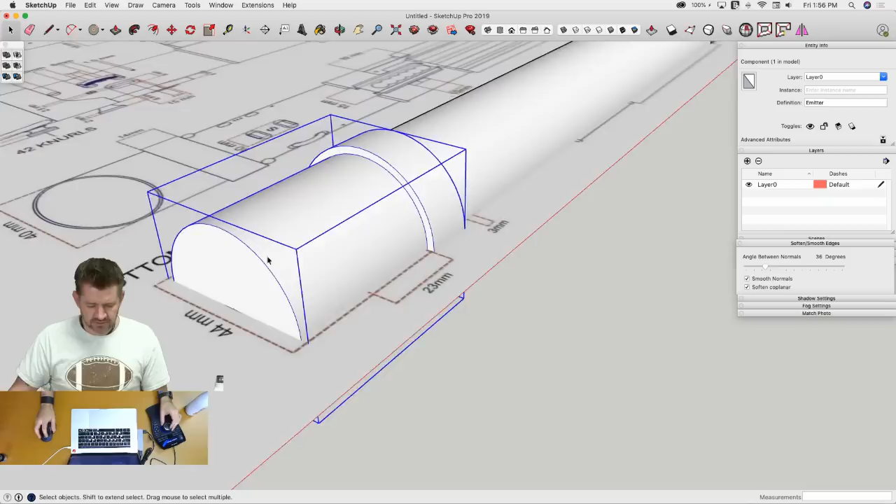So what I'm thinking about doing is taking this middle line and adding it to each of these groups. If I grab that middle point and drag it out to this same point, that means if I move this away, as long as this point doesn't change, I should be able to drag it and drop it right back into the same spot. I think that's going to work well because I'm going to want to reference stuff off of each of these images as I go through here.

And that should help. All right, one of the things I want to do is right now this is symmetrical on all sides, so I want to get this angle cut on here. I'm just going to use the image. I couldn't find a spot where the actual angle is called out, but that's okay.

Dave asked, why not use components? Did I not use components again? You were using groups, I think, before. Right, you're right. I could just leave this here, Dave's pointing out. I really blame everything on trying to think about things. I don't know, you're right.

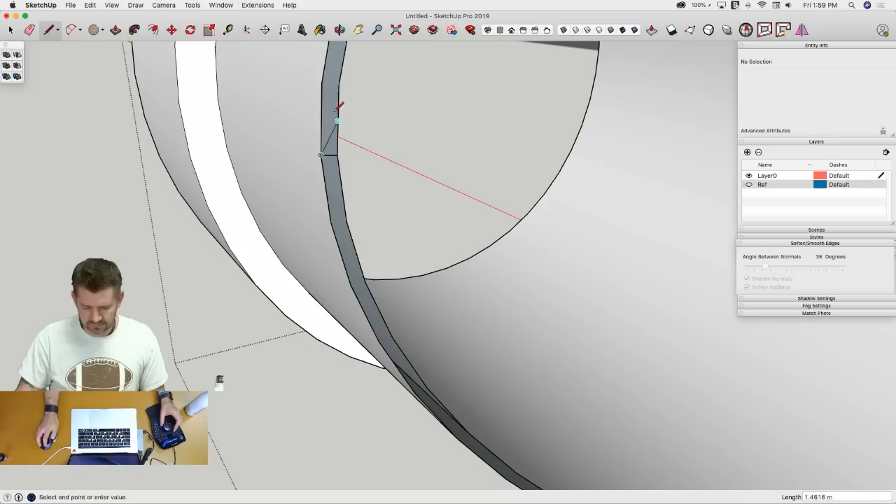It'll be open right now because I didn't intersect with a surface to make it fill that, but I should be able to come in here and it should be pretty automatic. If I do two of these, it should close the whole thing. There we go, awesome. Now I can take this piece and put it back where it goes and leave it there. Yeah, so that looks pretty sweet.

Now, because it's a component, I can just grab a copy of it and move it somewhere else and make changes. Why would I do anything else, right, Dave?

All right, so he mentioned Eneroth solids. Yes, Eneroth, I haven't used it very much. I'll be honest, I haven't used Eneroth solids very often, but I know they're kind of like the next level solid tools. They're good tools to have.

All right, so I'm going to pull this section out. In the profile, as I look straight at it where this thumb screw is, this actually comes up like this. You can see it real clearly on the image up on the forum. So I'm just going to pull a square like that, and then another square like that. Is that all the way down? Yep.

And they are rounded off. I don't know, I refer to these as kind of machine drawings. They're not like full-on machine drawings, they don't have as much detail as one would probably like. It looks like there's a 5mm circle right here.

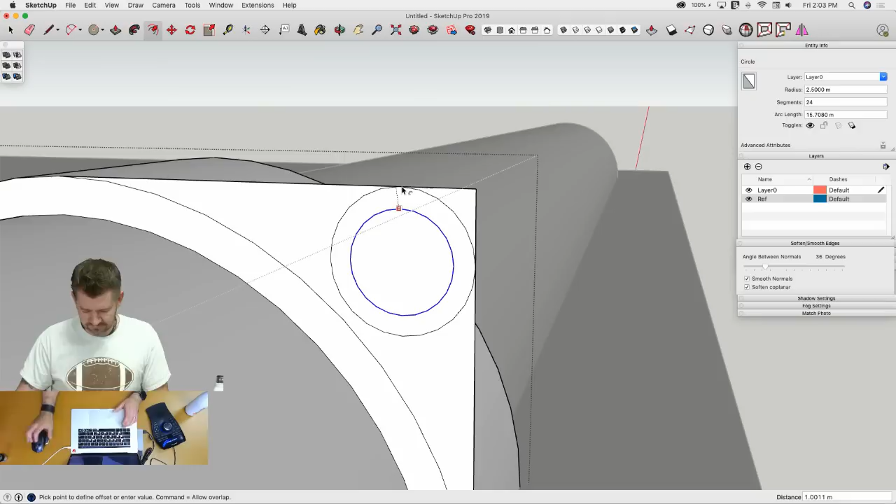I don't know, all right, I'm going to go back to a 24-sided circle and draw my 2.5 radius circle. There we go. Now one thing I could do is take this and offset it up 1, which will give me my corner right there. So a different way to do it. I was just trying to think of some other way I could do that. And I can grab that with an option and drag that straight down to where it intersects down here. Erase that, get rid of that.

And there, while complaining about my schedule, I was able to draw in that detail. I shouldn't say complain either. I thoroughly enjoyed everything I got to do, but I think maybe the shortened weekends are taking their toll on my psyche. And we know how fragile that is. All right, so that is our 14 millimeter collar piece right there. That's not it, we're not done, because it does kind of do this other thing here where it steps back.

I may go ahead and grab a copy of that component. I'm not moving it, of course, because that would be silly, right, Dave? Let's say option. Jimmy wants to know why I'm drawing side B but working on the bottom image. Because I started there, I drew this tube here, and it was out of the way. To be honest, right now there's no information I'm pulling off of there, so I just left it. I just dropped it and didn't do anything else with it. Hopefully that's a good reason, hopefully that makes sense. No reason better than that.

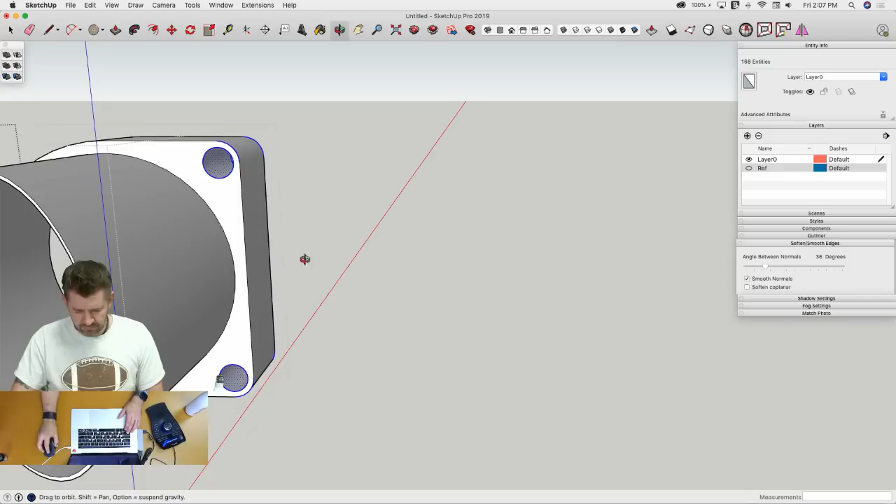Here's what I'm going to do. I'm going to come into this, get rid of my reference images, and I'm going to start by grabbing my arcs and circles on both edges, plus this and this. And I'm going to take that up 2 meters. That should give me... so if I come back out to my reference image, that should get me closer. Yeah, there we go, see, look at that line. Ooh, I like it when stuff lines up. That's nice.

The other thing, so right here, see, this is the outside of this right here, is this line right here. This right here is thinner. I don't have a solid dimension, it doesn't look like... I can't find a spot where it dimensions what this actually is, but if I look at this ring distance, I'll say 1.5 millimeters. So it's going to come in 1.5 millimeters on here.

So I'm going to do this and hopefully not make too big a mess. I'm going to start by... let's see if I grab all of this and just drop it down. Whoop, 1.5. Alright, if I was really going for my own version of Lightsaber, I might be okay with calling this, but this is Darth Vader, we gotta respect the man.

You know, as I was watching the original New Hope, and I was there with my kids, which was awesome. That was really cool. But there's a scene, I don't know if you guys remember, where the Empire boards Princess Leia's ship in the beginning, and the two droids get in the escape pod and go down to the surface. Then they have the scene where the stormtroopers are searching for the droids. I don't know the last time you watched it, but it's the most awkward scene in the world - they pan across the sand and show stormtroopers in the background, and one stands up with this little silver washer thing and says, 'Look, sir, droids.' Then it cuts to another scene. It's just so weird and awkward, like it's not a conversation, he's making this declaration and it's all slow. Oh it's so funny. I found way more humor in that than I ever have before watching it this time.

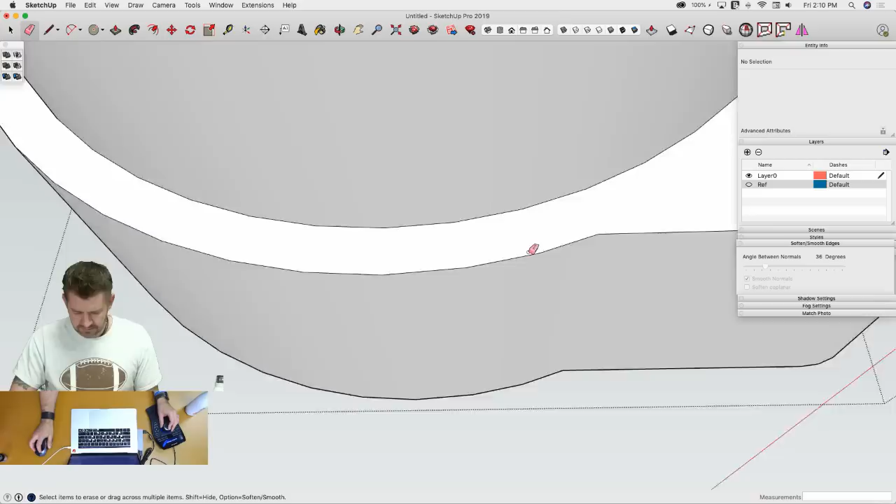So what I'm doing here is grabbing that circle, that arc back here. I'm going to grab it by a point, then option copy it to another point, so this continues the path of the circle to where it would meet right here. That gives us this section right here to push pull back, and then smooth that to give us extra geometry. There we go. And option erase, get rid of all these extra lines. Oh yeah, there we go.

That's pretty cool. So like I said, we're still not there yet though, because this piece does carry back a little bit further. We need to get our reference image back again.

Yeah, it was pretty cool, Marvin. I was actually going into this thing knowing the company was going to do it. I was excited, but I was kind of wondering what I was going to see, what was I actually gonna get. And like I said, I gotta say, I was pretty tickled when they said they were gonna show us the original version.

All right, so this looks like this section extends back another 12 millimeters. So here's what I'm gonna do. Oh no, that's this - where's that 12? All right, so we got this ring right here. Something extends, yeah, 12 millimeters is here. And then this is a separate piece. So I'm gonna come in here, take this through 12. And now I'm gonna come in here and just make another. No, that was not what I wanted.

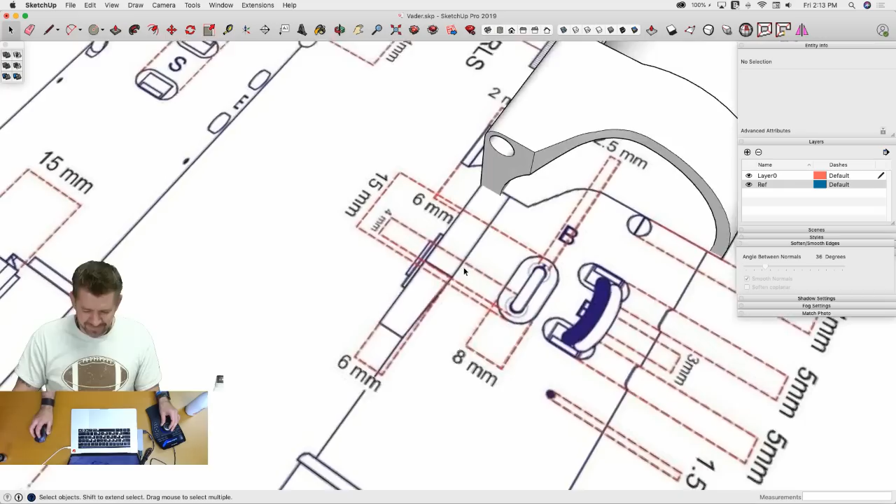All right, so this piece right here is actually an extension. No, it's not, it's actually laid into this other piece. So I'm gonna come in here.

It was cool. Like, if you're into any kind of sci-fi or anything like that, the original trilogies, of course, one of those things you like, you love. But I remember the last time I went back and really watched it and got into it, it's fun, definitely a good time.

All right, so it looks like this right here, this little crescent shape, is actually a gap. We're going to reference pictures because this piece right here is all one solid piece. And then this piece right here maybe is a step down or a gap between the shroud, this emitter shroud, and this thingy piece. We'll see what happens, I'm gonna start drawing some stuff. Let's see, come up like that.

I'm going to draw a line like that, come to the middle of this screw, and draw a line out to there. All right, so that is going to be my initial shape for this piece.

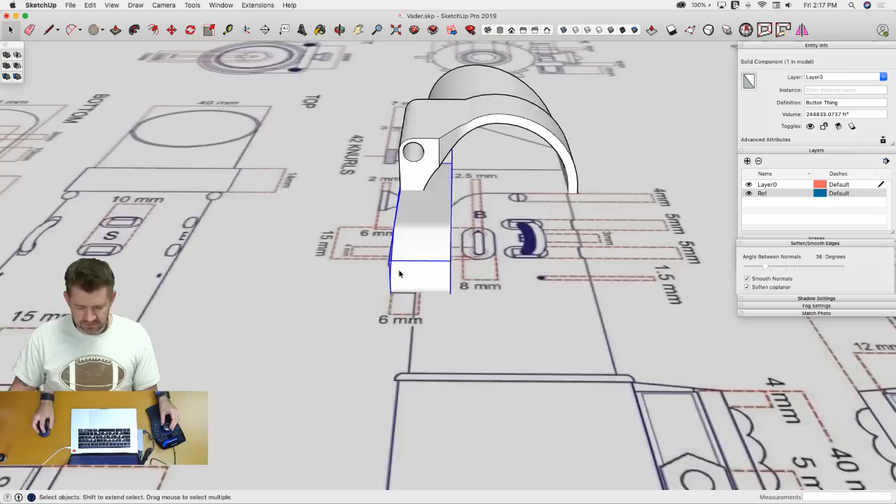This piece is going to get cut to the surface of the main tube, so I'm just going to leave that exactly the way it is. And then this piece right here has some additional detail I didn't put on there, but it does look like this little thing cuts out of it. I can't really tell what happens there, so I'm not going to mess with it. I'm just going to take this and trim it away from there, so these are two separate pieces now.

How to do this—look at X-ray. How far does this come out? It doesn't, again, dimensions... oh, maybe this is, nope. So this little piece right here actually raises up. This surface continues out into this little island here.

That has a knurled screw that sticks down through it, and that's actually the piece that the D-ring connects into. I can't tell how far it comes out though, so I'll just do the same thing I did before. I'll temporarily hide these, and I'm just going to draw a line straight across here, and then I can actually...

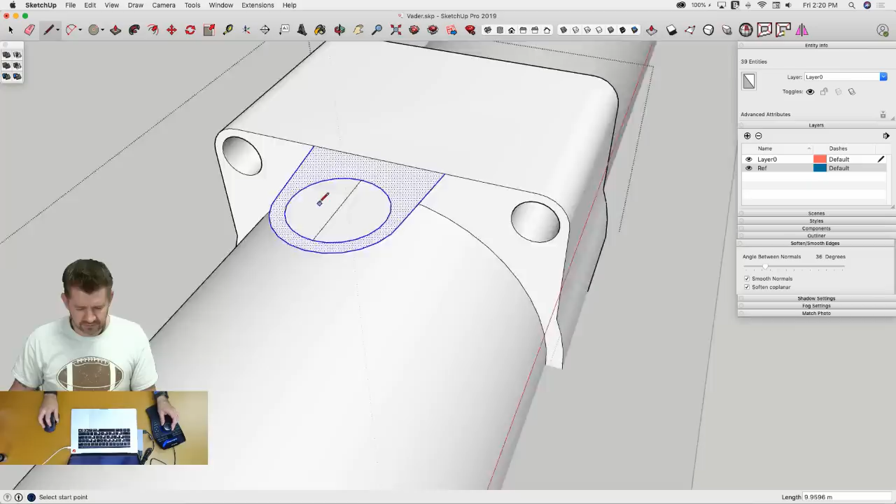I made this circle big. This is actually the top of the knurled circle, so it's not actually that big, but I guess I just left it there because this was one of those things that I did because I did. So I'm going to go ahead and just keep where my center is and then push this down into the top like that. All right, this is a thing that may happen to you one day.

This is all looking great, except I need to intersect this right here. But I don't want to intersect the inside, I just want it to sit down on top. So rather than doing solid tools, I can just intersect these two pieces using intersect face with selection. It'll give me a break right here, so I can go down on the inside, double click, delete that, and get rid of the extra geometries.

There we go, so we're getting there. That's looking good. We have, let's see.

Wait a minute, component, solid group. I'm unhappy that that is what that is. Here's what I did. I gotta look back and see if Dave caught me on this. I don't see it. So when I did a solid tool intersection to put this cut right here, it was this cut when I did this piece. When you use solid tools, it actually doesn't use components, it uses groups. So though this was a component when I started, as soon as I did that subtraction to cut that out, it saved this as a group instead of a component. So even though these two were originally components, this has now become something else.

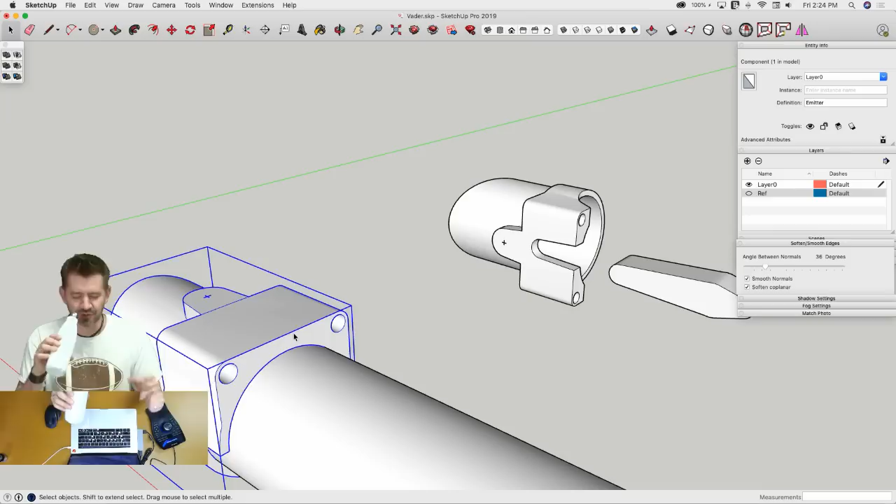All right, I'm gonna go hide my reference image. Dave said he was watching and he wanted to see how far I'd get before I caught it. Thanks, Dave, yeah, hang me out to dry. I gotcha. Shouldn't I have felt a disturbance in the force? Shouldn't I have felt 150 of you guys shudder or something? Nobody caught me. Because darkness is light, that's right.

Dark side, all right, I'm just gonna delete this component completely, and I'm gonna make this into a component, and call this the emitter. It's gonna ask me if I wanna overwrite. Yes, I do, I do wanna replace that. Okay, let's try this again.

Anyhow, good stuff. So this is kind of fun because I gotta come in here and clean this up. I'm just gonna do the same thing I did before. I'm gonna use these circle chunks to reference. I don't know if I have a circle, a middle to reference off of. So I'm gonna rotate those up. That didn't work, oh, because that's not a circle, even a little bit.

All right, let's try this one right here. Oh, there we go. All right, so I can grab that. Where is that point?

Hey, I actually had a compliment, and I'm calling it a compliment. Somebody went on one of these live videos and said how much they appreciated how much my mistakes and my slip-ups taught them. I took it as a compliment anyhow, that felt like the best way to take that. So here you go, learning opportunity again at my expense. Well, yeah, nobody will make that mistake again. Better not, look back on this one and remember what not to do.

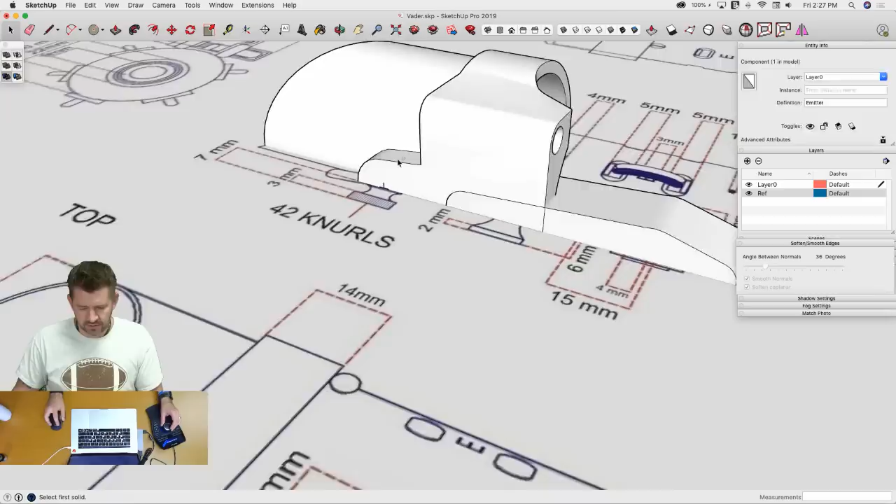All right, that means I don't have to come in here right now. I don't want to lose my center point, so actually can I, oh there we go. My circle here still works, so I got my center point for my thumb screw later on. Now I can take this one, trim it out of this one, and there we go.

Awesome. All right, I'm having fun with this emitter shroud, as I'm calling it. So I want to keep going, putting pieces on here after I save. And guess what this turned into again? A solid group.

So I'm going to right click, make component, and I'm going to call it... I'm not going to use solid tools anymore. No, I'm just kidding. It's called difference right now. I'm going to just call it emitter, which of course I do want to replace again. All right, I'm going to take care of this because it's nagging me a little bit.

This little weird offset right here, that's about 3 millimeters. What I'm thinking is I can grab this piece right here and scoot it forward 2.5. I kind of think that's what's going on there. I'm trying to look at the image that's been posted, and it looks like that is kind of what's happening. So by pulling that circle forward, I'm stretching the geometry, auto folding, and I get that kind of a sloped cut in there. I think I'm happy with that.

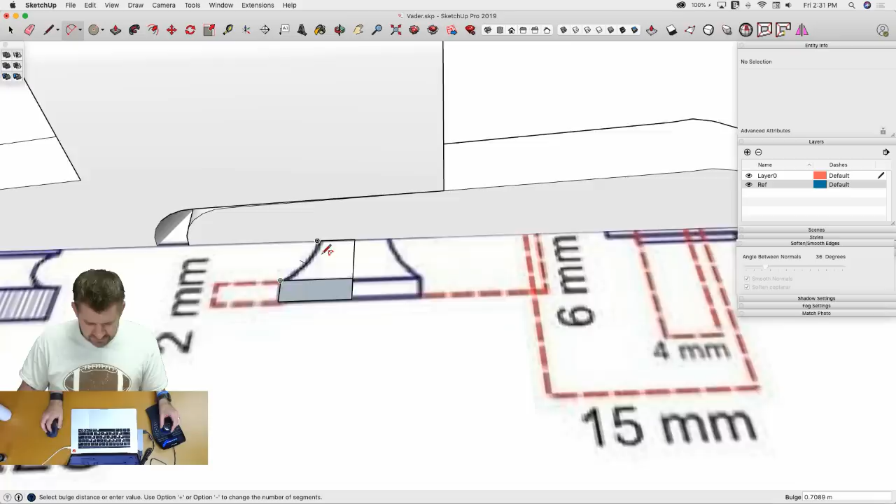So right here, I'm going to say this is the center. I'm going to come up here, come across, 5.5, 2, and I'm going to come across here, 3, and put an arc from here to here. Nope, I snapped off of the surface there, that's why my arc went away. There you go. So I'm going to take that now, put a circle in here.

I'm back to 24 sides for my circle. For these little ones, I think that's probably good enough. We'll see. Say follow me. There we go, and get rid of the circle now. Triple click, make that into a new component.

And this will be—I don't know what these things are called. We're going to call this the smooth screw, since the other one's going to be the knurled screw. Knurled's a weird word. Knurled. Say it with me, knurled. See, it's odd, it's an awkward word. Kind of like yogurt—it's always been an odd one for me too.

Marvin's heading out. Thanks, Marvin.

I'm not sure—I'm sure if somebody went and dove deep into the recesses of, in all respect I say, Star Wars nerddom, there is probably a description of what every one of these pieces does. I'm not doing that because I'm modeling. That's on you guys. So if anybody wants to go dive deep and find out what these screws do, I'd be happy to rename them. That's what I'm saying, I guess.

So this one actually kind of has a little collar here, and then like that. And then we have—oh, this actually may come right from the end. All right, so there we go.

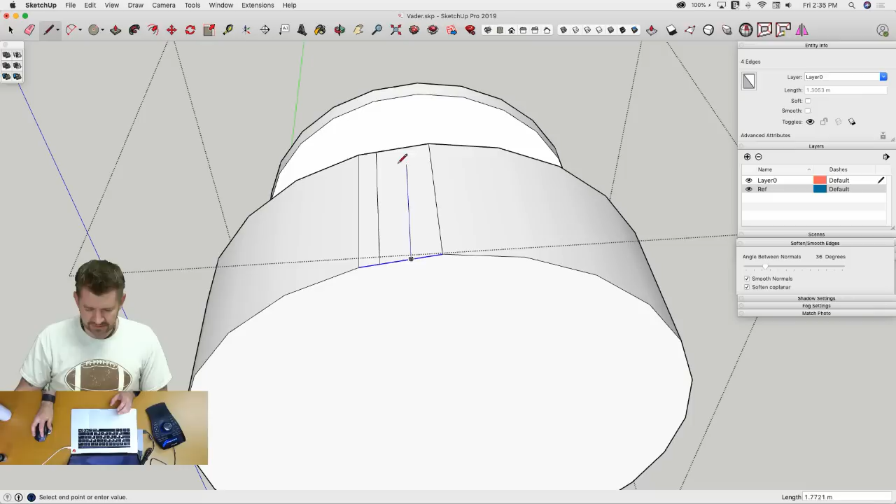Divide those 4 pieces like that, and then I'm going to push-pull, not by much, like that. See what I did there?

You have to break this because I want this geometry to all stay. I don't want to have to clean it up again and again and again.

Now what I can do is take just that geometry, those 2 little parts that popped up, get my center geometry, go to the middle piece right here, middle point maybe, here we go, and I'm gonna copy it, Option, copy it to here, X23, and that'll go all the way around like that.

Now if I triple click like this, I can actually use cleanup to merge faces. That'll get rid of my little breaks right here, or not.

Oh, let's try this - I might have surface. There we go, I had a bunch of internal faces. Now I can select this, clean up, merge faces. There we go. Now I got a knurled knob with no math and only native tools.

Okay, I used cleanup. I could have manually done that. Cleanup's really for your sake more than mine, because you guys don't want to sit here and watch me delete 48 teeny little lines - both sides, that's almost 100.

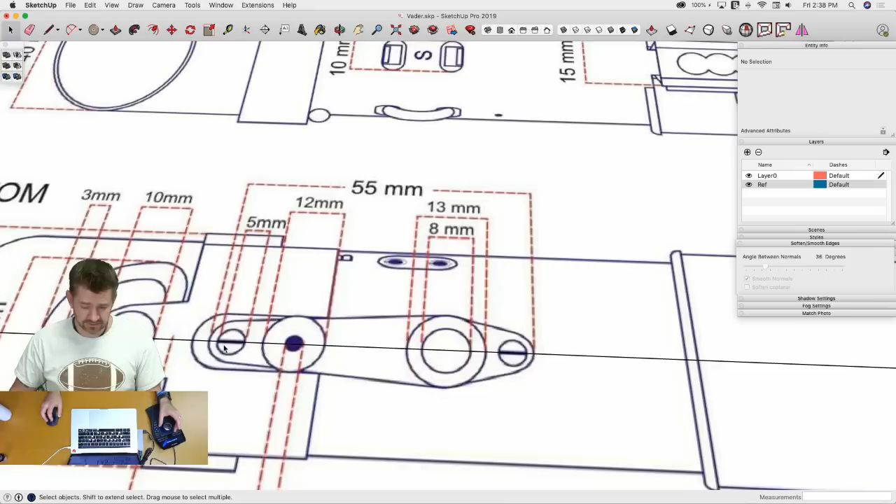And you know, Sith Lords like Darth Vader make sure their screw holes are aligned, or their flathead screws are aligned, so we'll honor that. I'm gonna go draw a line here and a line here. I'm just using the middle points and I'm just gonna push that down that far.

Right there, right there. And again, push, pull, double click. All right, so that is all of that stuff. Oh, except for my D-ring. You know what, what are the odds that the D-rings are exactly the same size? Let's go, do I still have it open?

Let's go hop on over to Obi-Wan. Shh, just had an image of Darth Vader sneaking up behind Obi-Wan and taking the D-ring off of his lightsaber while he's not looking. All right, we're gonna steal this from Obi-Wan, because Darth Vader's a bad guy. That's why it's funny.

We're going to go back over to Vader and I will paste it. Oh, ooh, here's an issue. It is 1/100th of the size of Darth Vader's right now. So I'll place it right here and immediately hit scale.

And grab a corner and just start scaling. Scale 100 times. Why did that not? That seems like that didn't scale properly. Nope, 1,000. There we go.

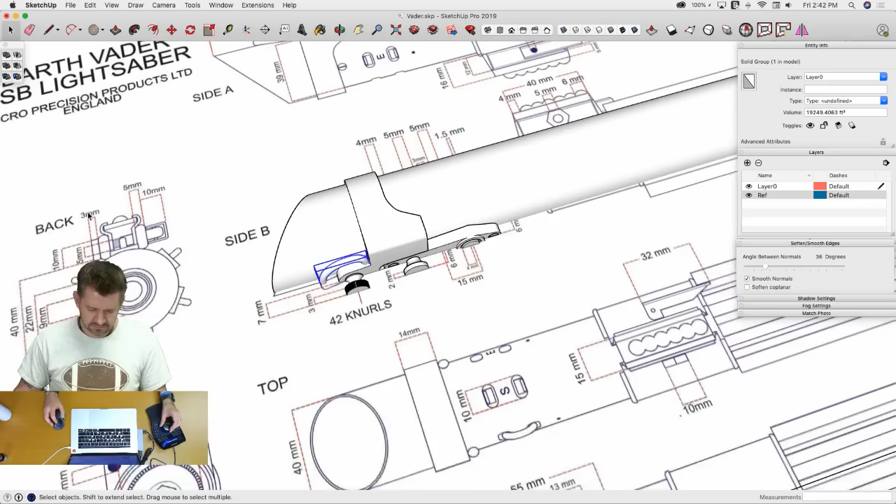All right, the other cool thing is this actually repeats as well. Looks a little bit different, but we might be able to steal a little bit more from the other piece. But I'm not going to focus on that just yet, because what I want to do is, as we're working our way down here, I want to get this collar on right here and then get these grip pieces also. So I'm going to do that.

Let's see, I think it goes all the way around, and then it actually is this piece right here, I think. Yeah, maybe I don't have any idea how this works. Never stopped me from just modeling before. Oh, you know, I think that this right here, I think here's what happens. I think this piece actually goes down like that and then forms that thing. I think that all of that, and then it goes out further on the other sides.

I'm gonna try that, I'm gonna see if I can make that happen. So if this is 1 millimeter again, I'm going to find the middle. So I want this, so right now, oops, I need to change the number of sides. Back to 48, so that's 19.5. So if I do 20, that's now a 1/2 millimeter bigger.

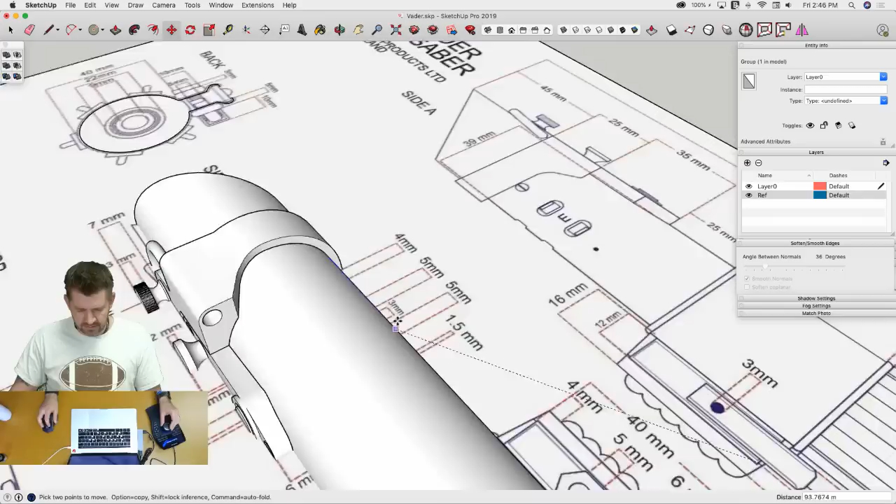And now I'm going to do this out here in space rather than on top of a drawing, no particular reason, just because I want to. All right, so I'm going to go grab this, flip this back to vertical, and I'm going to grab it by the middle because again, that's where I want to. I accounted for 1/2 of this offset. So now, whoops.

I'm just going to grab this profile, say follow me. Now I can't follow me with this because it's currently a group. But what I can do is right click, edit group, and then click on it to start that.

There we go. That is a sweet looking piece.

What's the accessory you're using with your left hand? This is a space mouse. It's basically a 3-dimensional controller. It allows me, without using this hand at all, to move this model around in 3D space. It saves me from having to stop working to orbit, so I can actually move this piece while I work on this piece. I use it a lot for 3D modeling because it's a lot less jarring than doing this all the time.

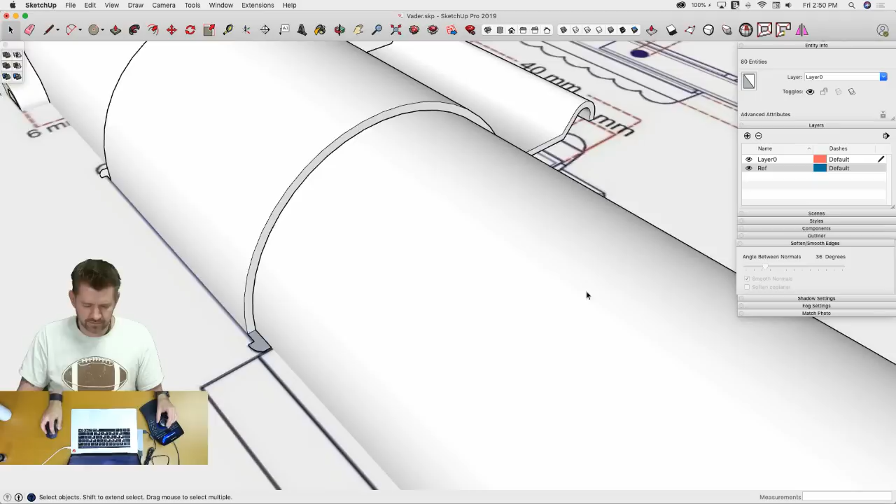Oh no, my geometry all broke. Wait, no. It did break. Well, my thought now is just to grab, how about this side? Nope. This side? Nope. All of these broke at some point during that process.

I'm just going to draw a new circle to use as a path to follow. Of course, now these are all broken, and I don't have an easy center point either. That's not going to fix that, but I can select this, weld it, and delete this, and hopefully it'll be better.

Okay, so now with that, I don't know how this is going to turn out, you guys, but we're going to do it. So I got that path selected. I'm going to save, and I'm going to follow me with this right here. Less than ideal — that's how that turned out.

Okay, I don't know what that was. Oh, you know why? It's because I'm on this. I'm not. Well, let's see here, I'm just going to copy it around by hand. And it's a little bit weird because I did something wrong. Again, Dave's giggling right now because he knew exactly what I was doing, and I didn't do what I was supposed to do.

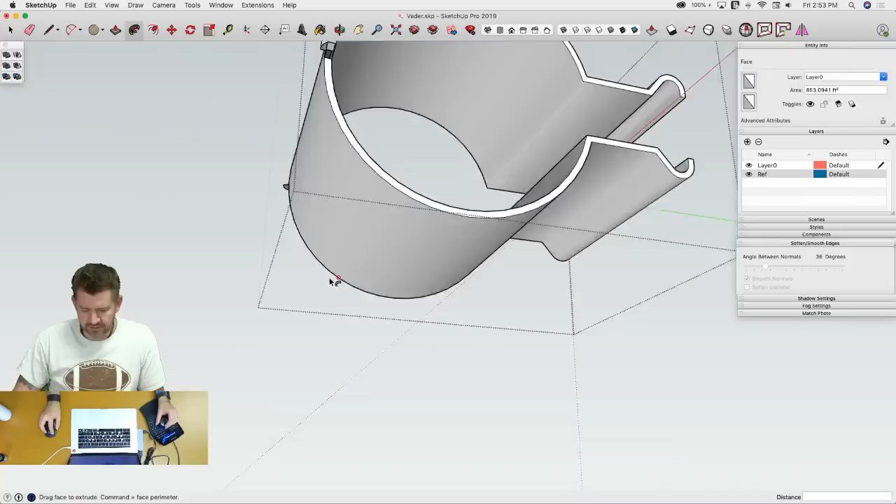Go, follow me all the way. Come on, there's something odd going on in my model right now. I'm having some weird inferencing, it's snapping off at weird spots. I don't care for this.

It may just be this circle for some reason has something odd going on. I assume if there's a problem, it's due to something I did. I try not to blame the software. SketchUp usually does what I want it to do, it's just that the things I tell it to do aren't the smartest things to do.

All right, so follow me again. Yeah okay, you asked, I'm telling you. I'm jumping ship now. Let's try that again, let's start over. I'm gonna come back in here and get rid of this upsetting geometry. It's pushing my buttons right now.

All right, so what I'm gonna do is find a nice flat spot. What's this, what do I got going on here? Okay, that's gonna be my line. I'm gonna draw my profile on that line.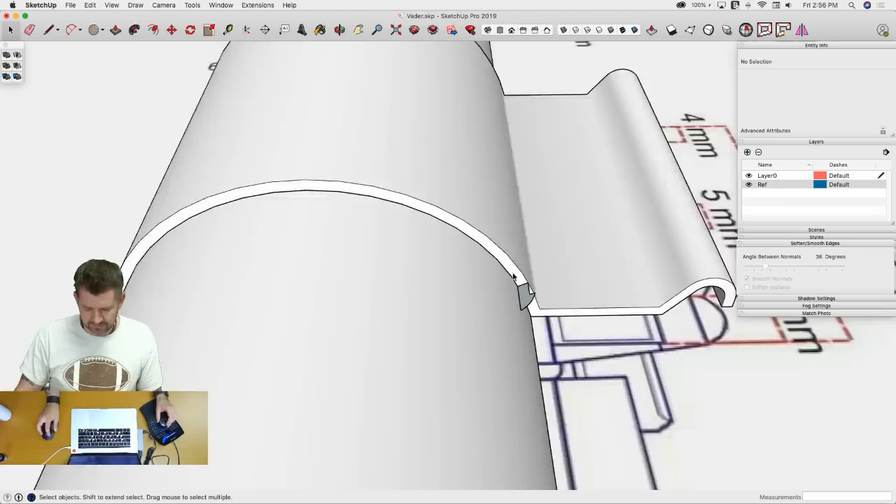And now, actually I wonder if I could do this from out here. Can I just go follow me? No, I don't have an arc there, so. All right, I'm gonna copy that. I'm going to edit, paste in place, and now I'm gonna try to see if I can do it.

This is one of the things we actually tell you not to do too, just because this is such a weird way to do it. You almost always want to pre-select your geometry, unless for some reason your geometry won't let you pre-select, and then I just don't even know what's happening anymore.

All right, let's grab this geometry. I'm really wondering if something weird is going on with this geometry here. I don't know what it is, but I'm kind of wondering - I don't want to start over with it, but maybe, I don't know, let's see what happens.

It's gambling time. No, it's an invalid path. So something is going on with this geometry around here, there's something wrong with it.

Let me try to weld it again. Let me grab all these pieces that make up this section of the path. There's these breaks in it, and I wonder if there's some small breaks that are preventing me from using it as a follow me path, which could be happening. We'll hop in here in just a second.

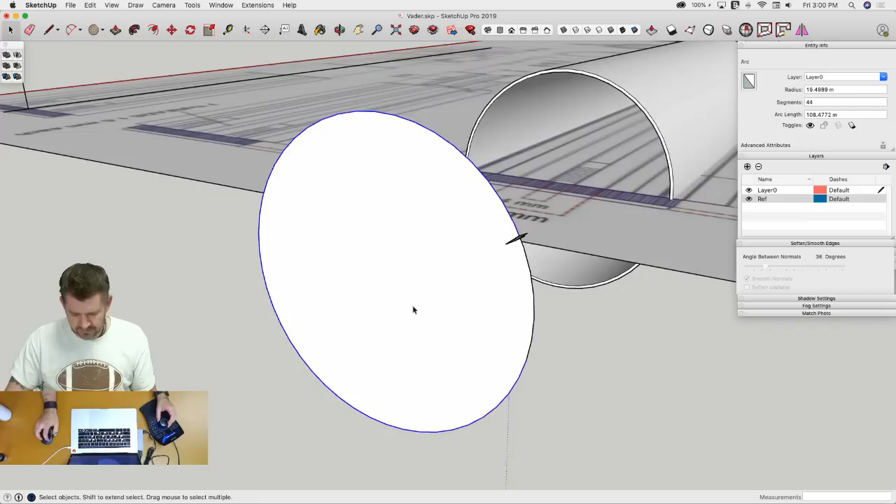All right, so that should be perpendicular to that. Now I can just grab this shape. Ah, it's broken again. But I should be able to just grab that and say follow that whole circle with this piece, that ring now.

Make that into a group. We should be able to slide that right back to there. There we go. I don't know what happened. I honestly have no clue why whatever happened just happened. Important part is we got something figured out, so that's a plus.

What I want to do now is actually break this at this point. I'm just going to come straight across like that. Do the same thing down at the bottom. I'm going to break that like that. And I know this is the way I end up doing it. I don't know about you guys, but I end up finding some small detail, almost indistinguishable, and beating my head against the ground repeatedly just to wrap that one piece up.

Dave said you could have drawn the circle a little smaller than the opening and used it for a follow me. That's true, I could have just gone straight around from there. Oy.

I'm going to copy that, go into here, edit, paste in place, select. Actually, let's make this a little bit bigger. Nope, can't do that.

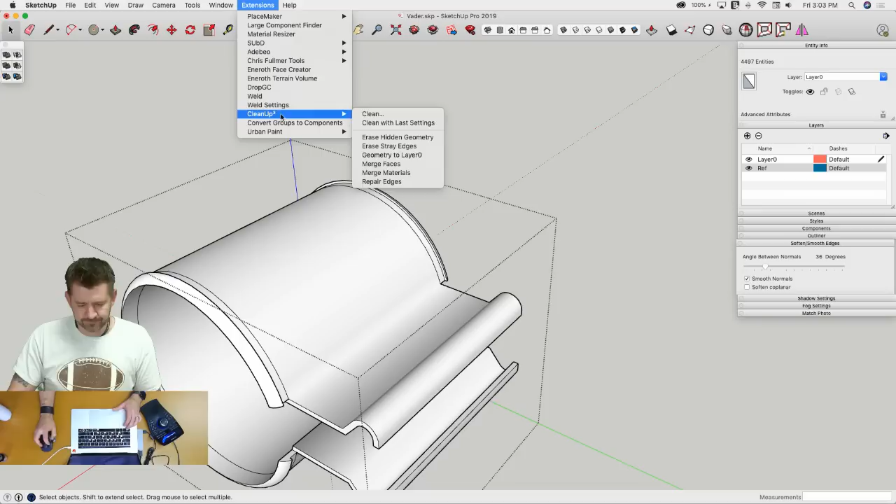All right, I'm going to take these three pieces, group them together, go in here, select all of them, explode, and I can actually come in here and also say solid tools to get rid of my interior faces, fix stray edges, and then I can run cleanup to merge my faces and get rid of those extra pieces.

All right, so there we go. That's actually a cool looking piece. I'm okay spending a little bit of time on there, but...

You're right, whoever asked when to jump ship, the answer was earlier than I did. Yeah, they said 10 minutes ago, and that was after when you answered it.

You called it. All right, so it does look like maybe there's a little more detailed cleanup because it looks like that cuts out, but I want to finish up some of these other pieces real quick and keep going. What time we got right now? It's just 3 right now, so another 20-30 minutes and we will call this.

Right here we have a rectangle. That looks like 40 by 12, which is, I actually have a depth on here somewhere. I remember seeing it, it is 5 millimeters tall.

It is, I'm going to call this a bumper because I don't know what it is. And I'm going to move that right to the middle of whatever this piece is. And I believe they actually show this as being rounded on both sides, so we'll do that. I'll come back here, 2.5,

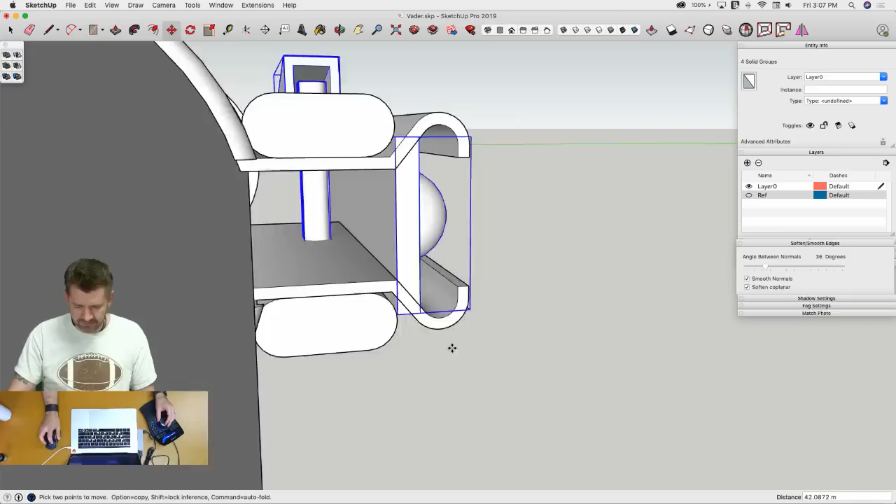So close, but not perfect. That's okay, little editing never hurt anybody. 1, 2, 3, 4, 5, 6 - there's 6 circles instead of 7. So that's a thing. 1, 2, 3, 4, 5, 6, 7.

So I'm just going to grab this piece right here, delete it. Grab this - I'm going to actually close the face up too, so not to mess with that. But then grab this piece. Okay, I should actually, I guess, not include that piece.

That's easy. And it also looks like this actually goes almost right up to the end on this end, so come in here and we'll push this to right here. And then take that piece and slide it all the way to the end here, and then I'm just going to push this back to here.

Not bad. And now this whole assembly right here is something else - that's it's on the other side for one thing. So we can actually, here, I'll just do this.

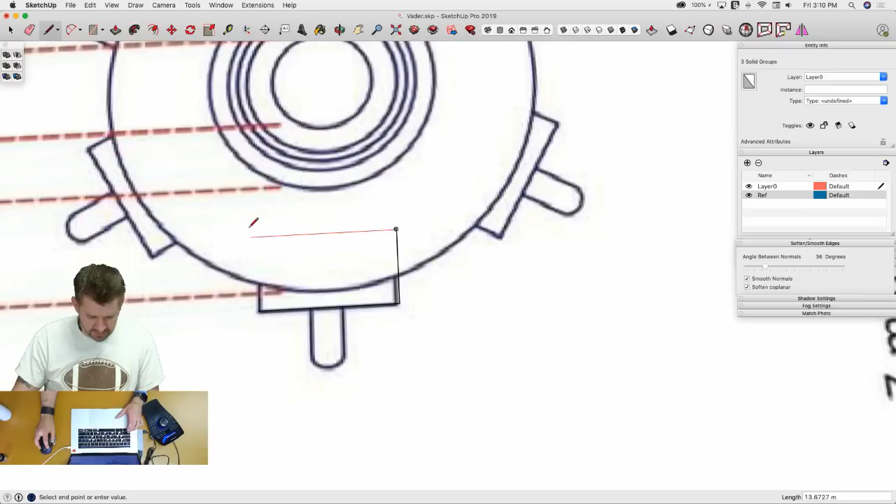And then right here in the middle of this will come up 5.5. I'm going to go 1.5. There we go. So if I go down here 1.5, do an arc.

All right, so there's my - I honestly thought that these, you know, a lot of the stuff on the props were repurposed, like kit bashing, that kind of stuff, where they took existing things and made them into things. I always thought these were windshield wipers because they look like it - they look like could be a windshield wiper.

I'll take that and actually, no, I'm gonna actually put it right on here. I'm gonna grab this, put it right here, and I'm gonna drop it down. No, it's pretty far down, not much of it's showing. That's actually good. And then I'm just gonna push pull that all the way up to the end of that.

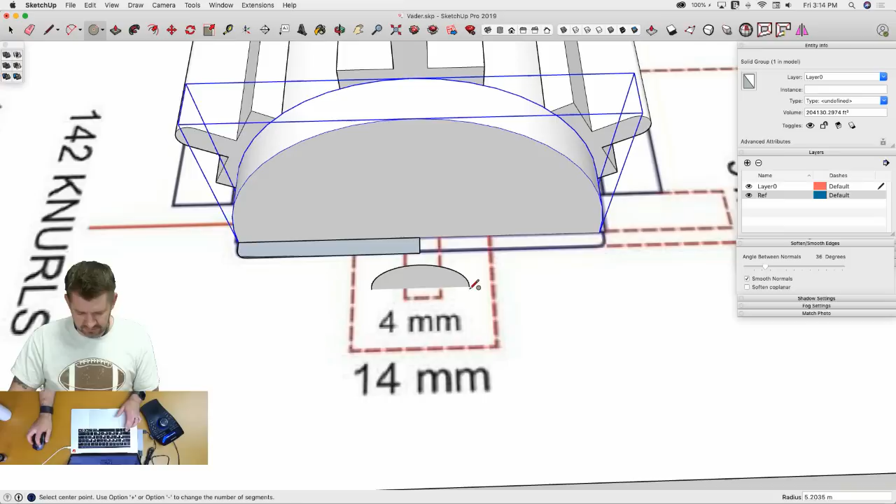I'll throw one more circle in here. This is what Dave was talking about earlier. I could have just drawn a circle off to the side and used that to follow me, but apparently I was really invested.

All right, so we got knurling on this piece here. I'm gonna do the exact same thing I did before. I'm gonna break one segment out of my 48, and I'm going to divide that. Maybe.

Select a line and divide edges. Oh no, that's the tool. Where's just regular divide? Oh, this side. That's odd, I can divide edges. Instead, I'm getting the Fredo Tools divide edges, which is awesome because that lets me actually just type it in and click OK. You guys were just talking about Fredo Tools. Fredo Tools, they're beautiful, I love those tools.

It's hard to use SketchUp a ton and not sooner or later find something you need out of Fredo. All right, so I'm gonna go about that big, and then I will take that, hide everything else for a second because again I don't want to have to intersect to get these faces to show up. Grab all of that. I'm going to go to the center. I'm going to copy it from this corner, Option, this corner, X47. There's my knurling. Triple click.

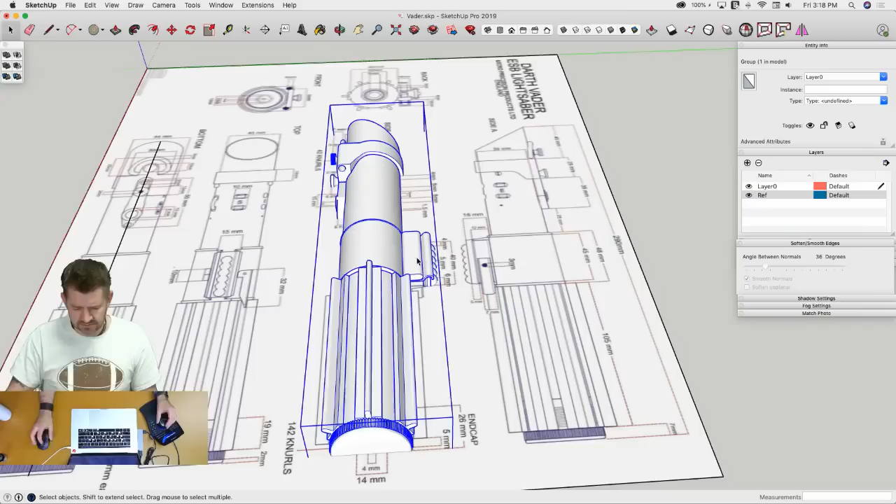The other thing too is that on these plans, this whole center ring piece is orthogonal, it's at 90 degrees, and it's actually not - it's actually more in line. This piece is in line with this grip right here, so it's whatever that is, 15, 30 degrees up from there. So that's something we'd have to fix. I'll have to fix too.

Speaking of fixing, I will just do that. How about - I'm gonna grab all of it. I'm gonna go see if I have a... don't have a good line here to use, so I'm gonna make one. I'm just gonna make a line there that I can rotate that whole piece, grab it and just rotate it 30 degrees. That's actually how that piece sits on there looking at the...

No wait, it's 30 degrees the other way. I'm sorry, I lied. So now I gotta drop it 60 degrees. There we go, that is how... Well, I'm aligning to the image on the forum. That's how it looks, that's perfect.

All right, so on the plan, there are these holes and these holes. You can see there's two sets of holes right there. So they actually look like they pierce through kind of perpendicular to this grip right here. I'm gonna take my whole lightsaber and rotate it like that.

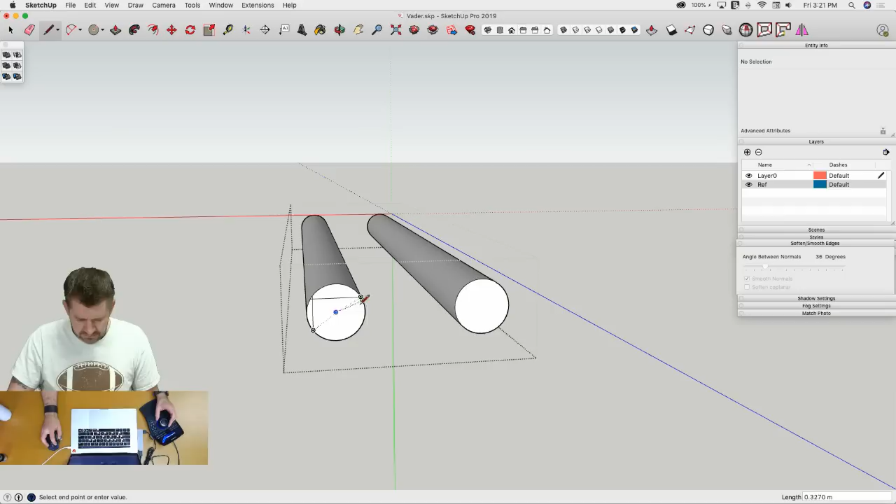I'm gonna come straight over and drop this right down. And that actually looks like what might be cutting in here. I don't know, we'll see. We'll do it, and if it's wrong, then it'll be not right.

Bold statement. Here's what I'm gonna do. I don't want to, again, I like having my component. We did that with solid tools and ended up with masses, or with groups instead. So what I'm gonna do is come in here, take all of this geometry, start by reversing it so they're backwards, and then I'm going to cut it. Now I'm gonna go into this group, edit and paste in place.

So what that did now, if I come out here, see that put some reversed faces, so the outsides are facing out into that face. Now I'm gonna grab all this geometry, right click, intersect faces with selection. And now I can grab these end pieces, delete. And that's pretty much the shape that I see on this drawing.

Delete that, delete that, delete that. Grab those faces, delete that. More delete, more delete. Actually, I can probably do this all at once. There you go, and now I just punctured the outside there to give me those good looking holes. Pretty easy, and I did all 4 of them in one move, so that was nice. That's a time save. Oh, and look, that's not lined up correctly.

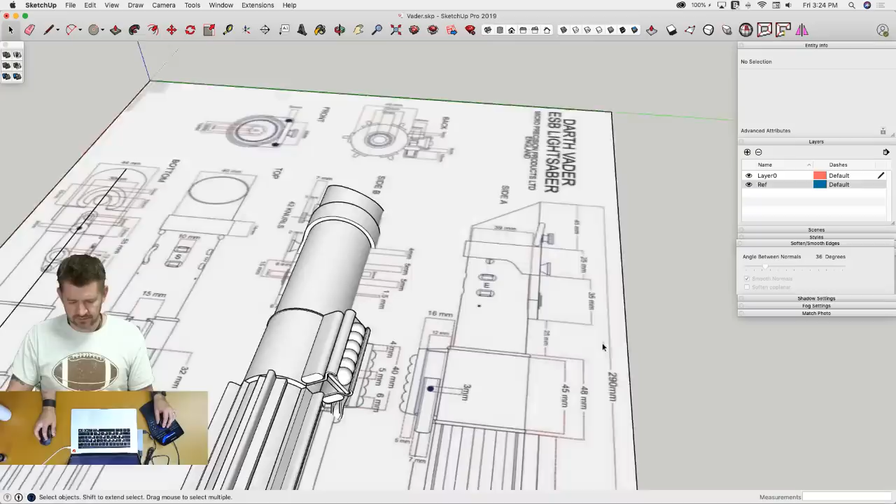I'm going to actually undo what I just did. Here, I will literally just go undo what I just did. I thought that's how it looked, but now that I'm looking at it, it actually looks a little bit different than that. I think what I actually got going on here, I'm going to back up even more. I think what's actually happening, I'm just going to trace this shape right here.

This actually looks like it may actually be on all 4 sides. It's just not, no, because it's not quite centered there. You can see it's here, and it's actually here. So it's on 3 sides, they're just not quite.

So I'm gonna grab all this, smooth it. I almost said smoothen, which I've gotten harassed for using before, because it turns out smoothen is not actually a word, in case you guys were curious about that.

I'm going to make that a group. I'm going to take it right now, lay it down flat like this, and then drag that with move along the green axis, so the end of this is right at the middle of the lightsaber. Because then, again, I'm trying to work this out. It looks like I got something like this.

I think this is at, it's not quite 90 degrees, maybe it's at 60 degrees. So let's put it at 60 and then do the same thing. Drop that this way, 60 degrees, because that's going to give me this hole right on the bottom and then these holes either direction, I think.

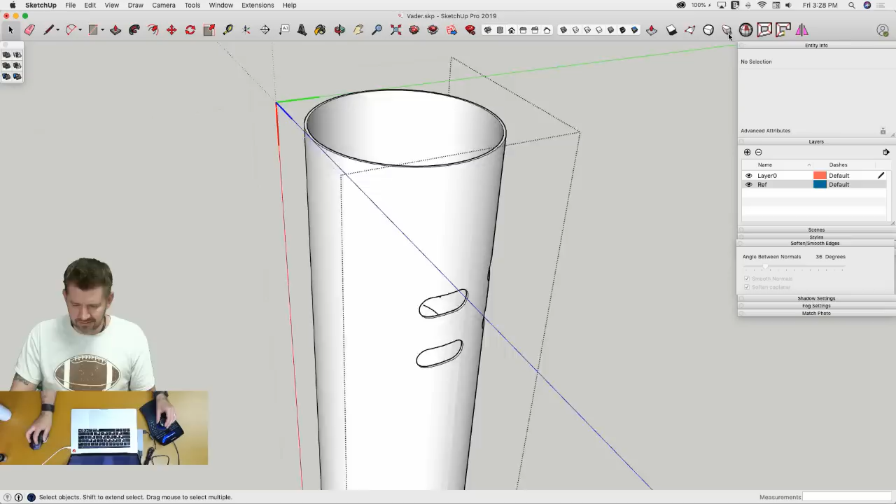Nope, I lost my internal face there. That was bad. There we go. All right, and I'm going to have some loose faces, but fortunately, since my group is a solid, I can just hit Solid Inspector and say, fix that.

No, that's definitely not right. It's in the wrong spot completely. It's supposed to be that whole thing. There we go, that whole thing.

All right, so first off, I'll rotate this back to flat. Now I can grab these three and rotate them 90 degrees. All right, so that will give me this one for sure, this one, which looks like it's the same size. I think this hole right here looks like it might actually be smaller.

So I might come in here, grab all of this, scale this something more like that. No, let's see what happens. Oh, sorry, Siri. There we go. So I'm going to cut it, come in context again, edit, paste in place, grab all this, explode it.

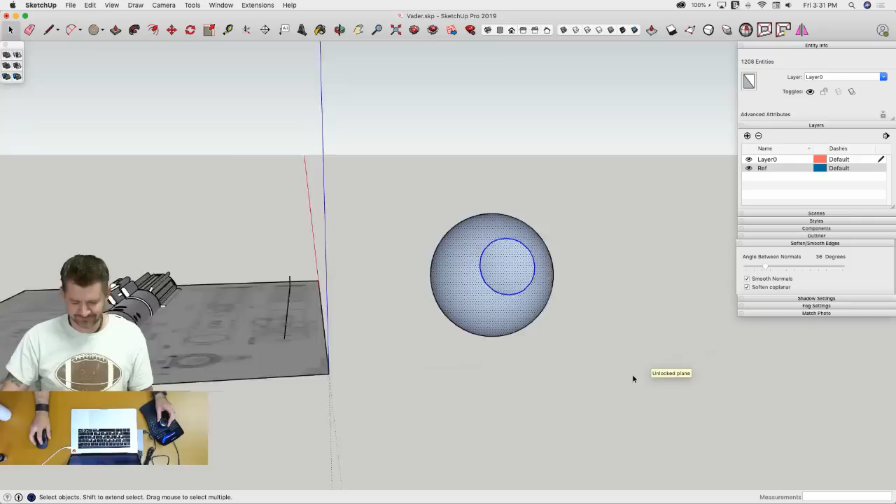All right, slightly off axis. Hold on, let me rotate real quick. There we go. It's pretty easy, there we go. I hear there's a higher level of detail in some models, but that's how I do it.

Okay, so I didn't throw an emitter in there. It is kind of an empty tube, but maybe I'll do... well, let's see here, let me just do something real quick. How big was the inside of this tube? What do we end up with? 38. So I'm just gonna make a thing that will fill that 38. So 38 is what, 30's 15, 19?

So here's 15. I'll offset that like what? Whoops.

Okay, and another circle right here for this thing that looks suspiciously like a hex nut, but is probably not, because it's in a galaxy far, far, far away where they don't know what those are. I'll go ahead and throw one of those in there though, since that's how we do it here on Earth. And then one more circle right here in the middle, 1 millimeter.

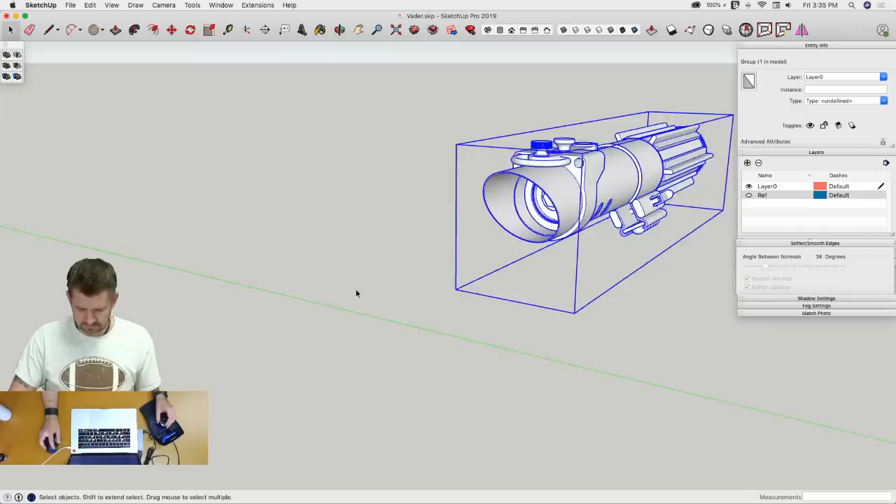It's looking upside down too. Let's... cool. Mm-hmm, that's Darth Vader's lightsaber, more or less. Getting there, close to it. Do I have... oh, that. Oh, hey, that's a good idea.

I take this a little bit longer. Actually, cover up those holes so you can't see into them. Awesome. There we go, that's 2 lightsabers in about 3 hours.

So I'm gonna lose the Death Star. Hope you guys enjoyed that. That'll go away, that will not be part of the upload. And I may, depending on how much it bothers me this weekend, I may come fix this little clip. Yeah, I can almost say for sure I'm going to, because that's not what it's supposed to look like.

All finished. So we have 2 lightsabers. Let's see if we can get them both up on screen with room for everything. All right, except for solid tools, gotta get rid of that.

Slide this one over, there's Darth Vader. I feel like I'm at a weird field of view on this one. I don't know how that happened. Obviously I did do that, but I don't know how or when. There, I left a lot of room for my head, more than I needed. Let's get bigger and come on over, come here guys, there we go.